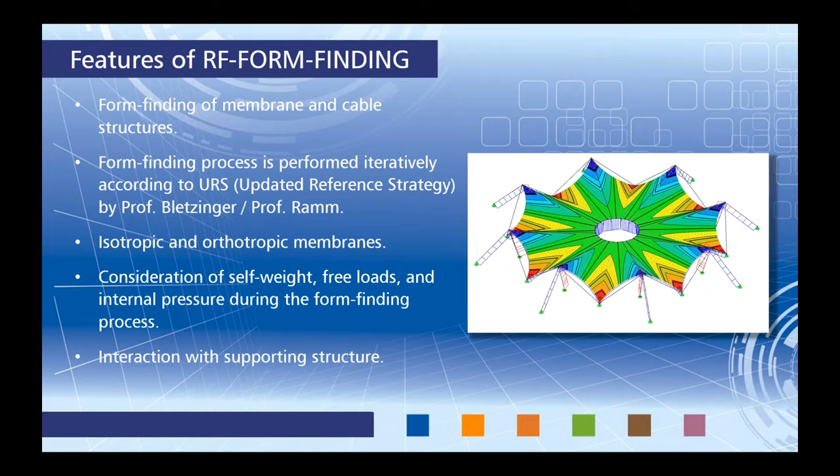Our other add-on module, RF-CUTTING-PATTERN, uses the minimum energy method for a very accurate cutting pattern. So essentially, we're turning this 3D membrane element into a 2D cutting pattern via the minimum energy method. We can also take into account uniform or linear compensation by warp or weft directions, meaning typically these membranes are going to be stretched when they're applied to our structure. So for the 2D cutting pattern, we can take into account that compensation.

We can also apply these compensations for boundary lines around the 2D cutting pattern, so it doesn't necessarily need to be in the warp and weft directions. We can also allow for different allowances, such as for welding and for boundary lines. Welding for overlapping members, maybe we need some additional material. Boundary lines for the upper and lower portions of the 2D cutting pattern as well.

There is adaptable data organization, meaning even after we have performed the calculation for our 2D cutting pattern, we could go back and easily add in some additional material for welding and for those boundary lines without having to recalculate the 2D cutting pattern.

And lastly, I'll show you how to output the cutting patterns both graphically within the RFEM printout report, as well as tables. And these tables can be exported directly to Microsoft Excel for further sorting. And lastly, we can export them as a DXF file, open them up in AutoCAD, and show you how to utilize the cutting patterns this way.

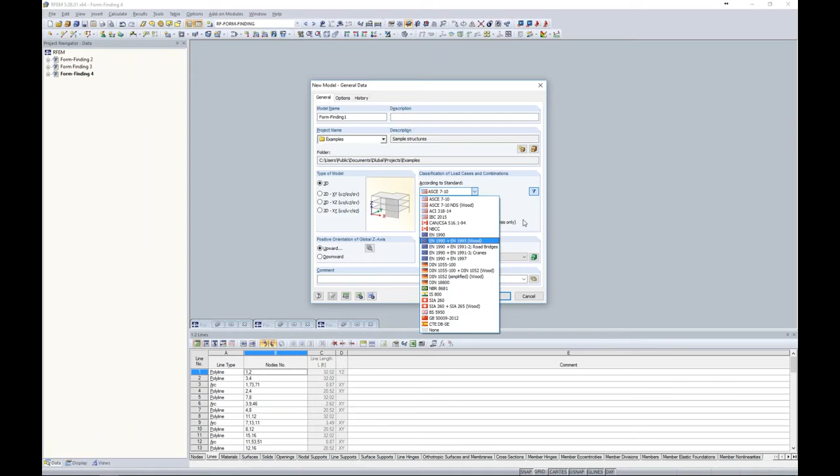So with that said, we can jump immediately into our RFEM model. When we go to open up a new model, we just give it a model name. I called this one RF Form Finding 1. The type of model is a 3D model. And our drop-down over here on the right is our load cases and combination generator. So you can see from my drop-down box that I have the ASCE 7 load combinations. I also have our Canadian standard, Eurocode standards, and many other international standards. When I have this checkbox checked, then the program will automatically create those load combinations.

You can see that when I uncheck this, then I can manually put in those load combinations if I'd like to as well. It's important under the Options tab when we're utilizing RF-FORM-FINDING and RF-CUTTING-PATTERN to check on these checkboxes. Otherwise, we won't have those options within RFEM. So when you're checking out the form finding of our membrane structure, it's important to check these checkboxes, and then we can launch our model.

So up pops RFEM, and you can see our basic graphical display here in the center. We have our tables to utilize down at the bottom. Over on the left is our project navigator, which controls some of the input data. We'll also see our results available here, and lastly, we have all of our tools up at the top. Today we'll be using all of these options.

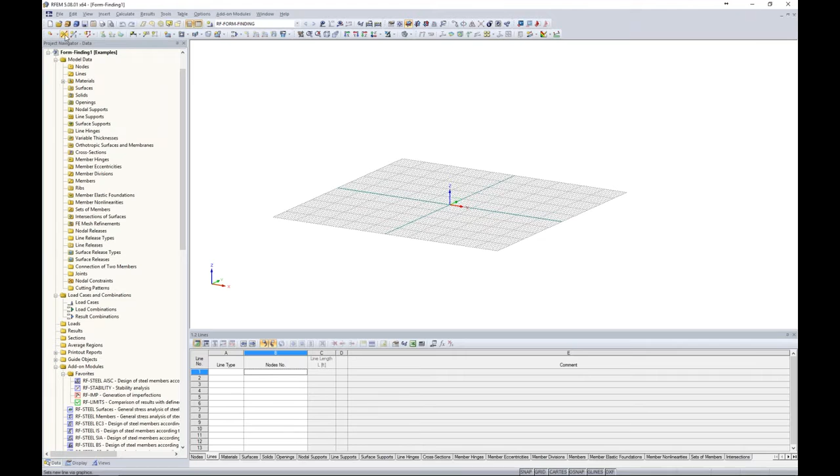I want to begin with drawing a basic line element. So up in my toolbar, I can choose to draw a new line, and you'll notice that we have many different line types. You'll hear me say this often today, that we have a lot of AutoCAD-like capabilities within the program. Things like complex geometries, which is quite common for membrane type structures, is really no problem to model within RFEM.

To begin with, we are just going to do a typical straight line here, and I could draw this graphically in my viewport, but I can also just enter in nodes numerically. For example, 0, -5, 35, then click apply, and I enter my second node at 0, -30, and 15, then hit apply. Now you can see we have this line element in our 3D view.

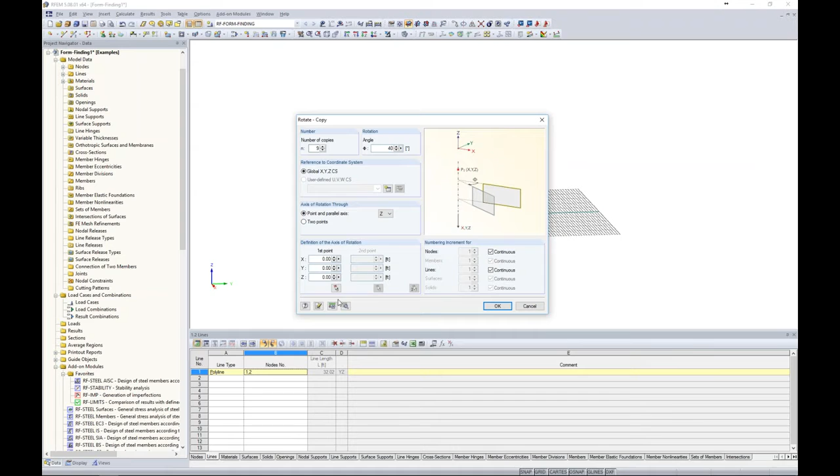I'm going to select this entire line and the nodes and use my rotate copy tool. Here I can specify that I would like 8 copies at 40 degrees, rotating everything about the origin 0, 0, 0. Down at the bottom, if I click on expanded settings, I can create lines between my copy nodes, and even create surfaces between those lines. Now when I click OK through all of these dialog boxes, I have my conical structure with just a few clicks of a button.

Now turning this into a plan view, and maybe I turn off my grid down at the bottom, I'd like to create cable elements spanning between my longitudinal lines here. A cable element certainly can't be constructed in the field as an arch type line like this, so we need to create straight lines here. How do we quickly do this?

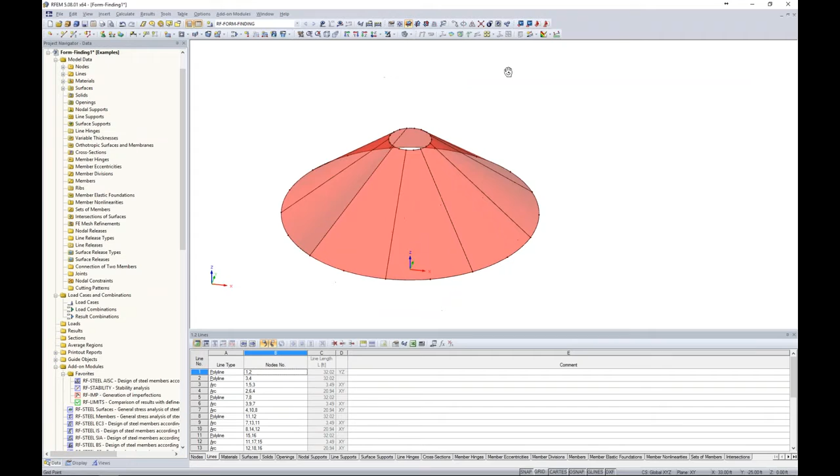I'm going to turn this into an elevation view, and highlight all of my members down at the bottom. You'll notice that my table 1.2 lines shows me exactly which lines I have selected in my graphical view. Using this feature within the table, I can show the selected objects only, so these are only my lines selected at the bottom of my structure.

The line type right now is set at arc. I'm going to change this to polyline, then using the F8 key, I can quickly copy that same setting down for all of my line elements here. Now if I turn this back to my plan view, you'll notice that these are now straight lines, but I still have this node in the middle that I'd like to get rid of.

For this, I'll turn this into wireframe view, and now holding down my control key, all I need to do is graphically select all of my nodes here. Then I simply click the delete key, and I have these straight line elements.

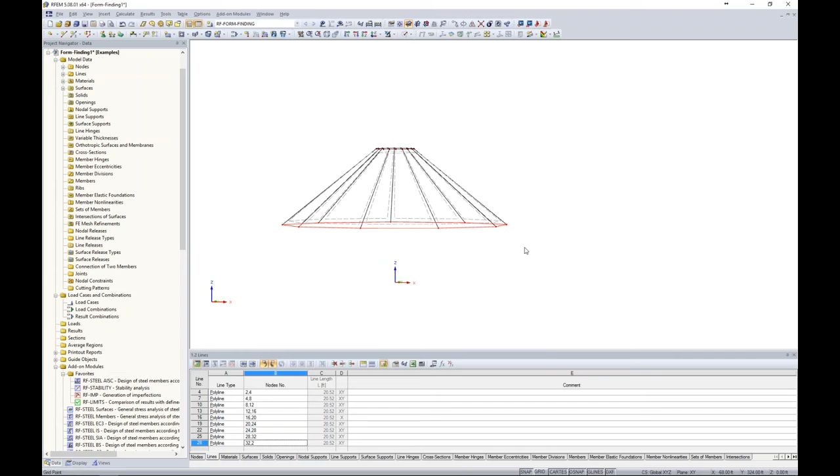With these line elements, I'm again going to select them graphically down at the bottom, and right click to edit the line. Every member within the program is created with a line element underneath it, so we have a nice tab up at the top called member, and we can create a member available. Now up pops our new member dialog box, and we can create a new cross section.

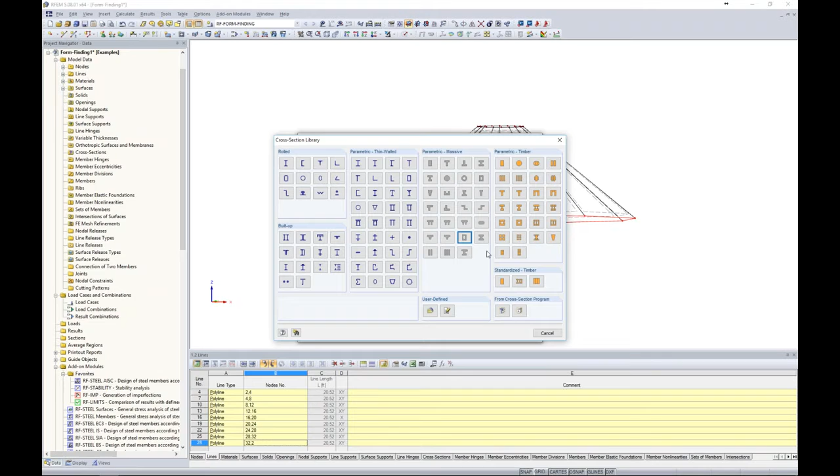Here I launch my cross-section database, and you can see we have many different cross-sections, such as rolled sections, built up, thin-walled, massive for concrete sections, and timber. For these elements, I'm going to utilize the solid sections here. We have our filters over on the left, which show some different producers applicable to the Eurocode design. We also have our AISC database.

Now I can scroll all the way down to the bottom to choose a half-inch diameter cable element. My default materials within the program are 4,000 psi for concrete and steel A992. I'd actually like to create a new material here.

My material database is brought up, and this looks similar to my cross-section database as well. I have my filters over here on the left, so you'll notice that under material category, I'm going to change this to stainless steel. Now I have the ASTM as well as Eurocode to select from. Looking at ASTM, I have a very long list of all the stainless steel materials I could possibly think of. We can also utilize our favorites list, which I created called USA.

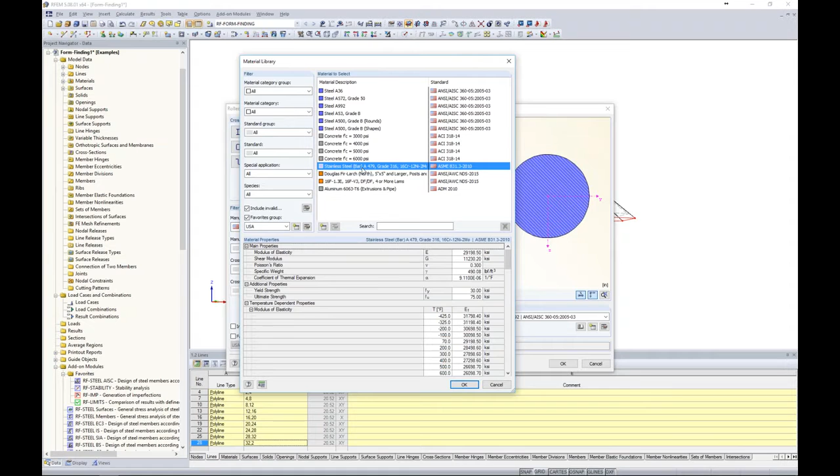These are just common materials that I use quite often for projects, and you'll notice I added stainless steel A479 here. I can select this material and click OK through all of these dialog boxes. Now the member type is set at beam, but I actually want to change this to a cable member - that's the element we're trying to model here. So now I can open up the member type.

This is available because I've activated the RF form finding add-on module; otherwise you wouldn't see this option. Here we have the cable parameters for form finding, and with this we either have geometry or force. With geometry, we can set a target cable length or a target cable absolute sag, relative sag. With force, we can set a force in the cable or a force density. These are the properties we'd like to see after the form finding process is complete.

When we're choosing geometry, this is maybe relevant for border cables and membrane structures, such as what we have today. The force option is maybe relevant for cable webs. For our example, we'll choose a target cable absolute sag of 1.5 feet, and I can click OK. So now that I've set this form finding capability, I click OK.

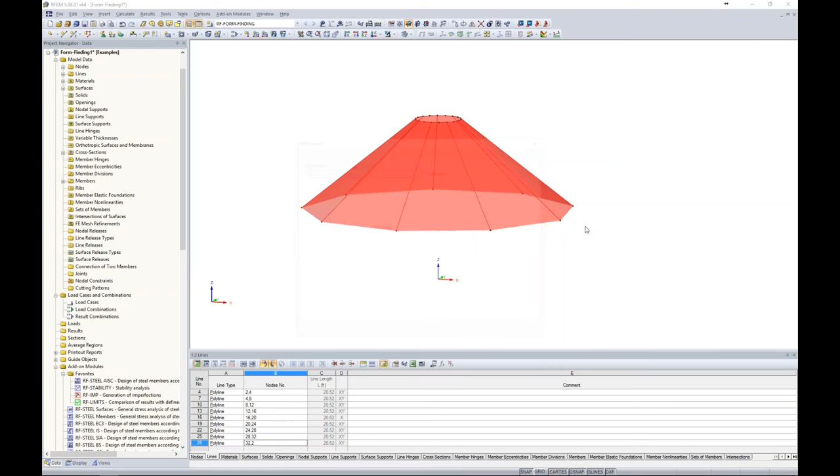Now we have the cable element specified down here at the bottom. I want to turn this back into the rendered shape to show you guys that right now my surface elements are red - that means there's probably something missing that the program is trying to flag. If I highlight all my surfaces, right click and go to edit, you'll notice my stiffness is set to null - null means nothing. So we need to put in these material properties as well as our form finding process for our surface elements.

So the first thing I'm going to do is use my dropdown to select membrane orthotropic, and here is where I'm going to create a new material. Membrane materials are not so straightforward as something like steel A36 or A572, for example. This is something we maybe get from the manufacturer, or maybe we do our own testing on these material membranes. So when I go to create a new material, I need to first give it a description.

Our material model by default is set to isotropic linear elastic. I actually want to change this to orthotropic elastic 2D. Now up pops my dialog box for my stiffness properties.

For this, I'm going to jump back to the PowerPoint to show you a quick screenshot of some calculations. For my membrane material, I got this from my colleague in Germany - basically these are the calculations after placing this material membrane into a biaxial testing machine. We apply different forces and get results based on stresses and strains with those different forces applied. We do our calculations in order to find out what these stiffness parameters are. So that's a little history about where these particular membrane properties came from.

Back in RFEM, we can simply apply those stiffnesses here. For example, it was found that EX is 93 KSI, our EY is 84. Our shear modulus is going to be the same in all three directions at 0.15, and our Poisson's ratio is also important at 0.314. Now I click OK.

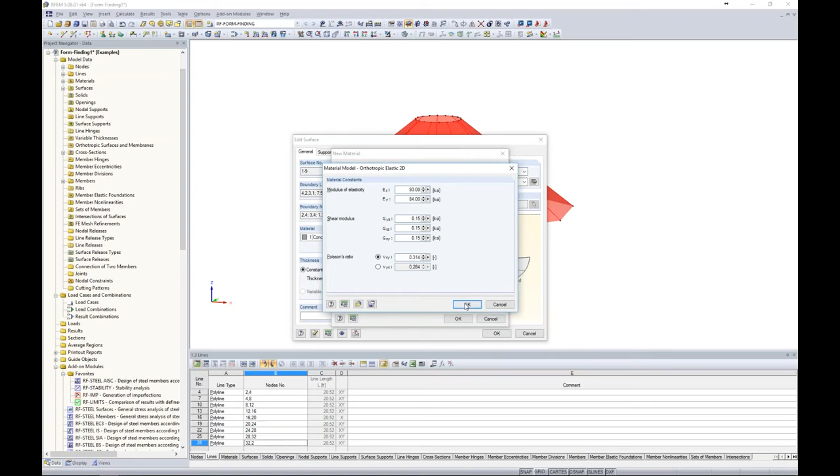So we have now defined the specific material we'd like to use for these surface elements. Now, similar to the cables, we'd like to edit the parameters of the stiffness - these are options that are available, especially this form finding tab, when we activate the form finding module. The type we'll use here is constant thickness, and under my next tab I'm going to set the thickness at 0.04 inches.

Then I can click on my stiffness matrix to see those values here, perhaps I'm interested in those. Under the form finding tab, this is the availability to define pre-stresses along the warp and weft directions with our form finding module. You'll notice we have two different calculation methods, both the standard and the projection, and this just comes from the general form finding method URS that I mentioned in the PowerPoint.

Standard is really used for membranes supported by points, arches, or pneumatic structures. Pneumatic just means they are air-supported structures supported by internal air pressure, which you can see here is where we define that internal pressure. Projection is used for conical shapes.

That's actually the type that we have today. But just for example purposes, I want to show you what this form-finding deflected shape looks like using the standard method to begin with, so you can see why we've chosen the wrong calculation method.

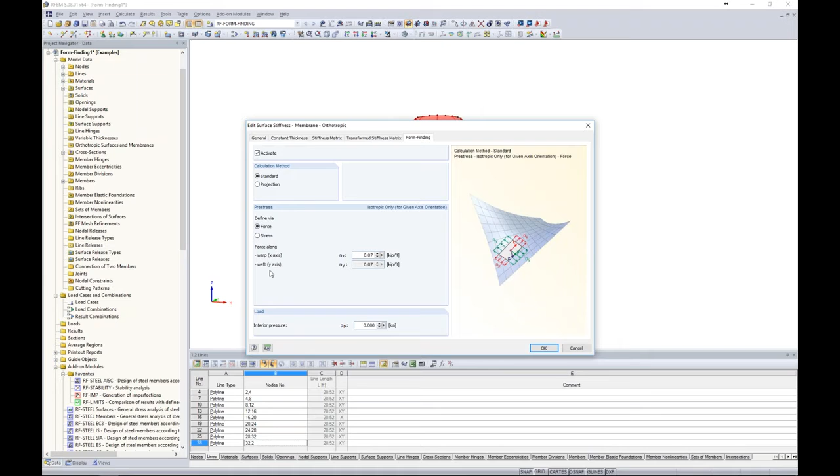Before I define these, it's very important that we go back to our model. You'll notice my material is now blue because we specified these specific material properties, and I can right-click and turn on my local axes. If we're going to define these pre-stresses according to the local axes, you'll notice all of my local axes are going in different directions.

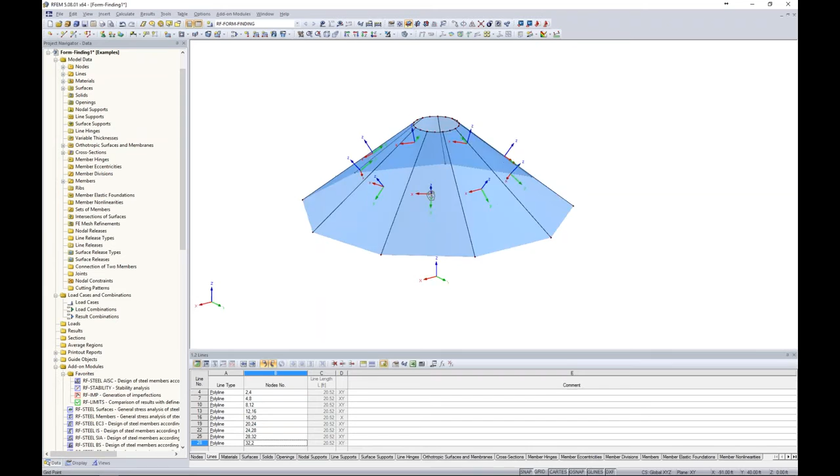So this is not good if we're going to apply our pre-stresses globally to all of our surfaces, and yet they're going in different directions. So how can we address this quickly without having to redraw all of our surfaces?

Well, if I highlight all my surfaces and right-click to edit them again, we have a tab called Axes here. Axes allows us to quickly rotate our local axes, and for example this third option down here, we can point all of our local axes direct to a line.

Now this line can be a fictitious line within the model. Here, for example, we'll choose the origin as the bottom point, which goes right up the center of the structure, and our second point will be at the origin but at a Z elevation of 35 feet.

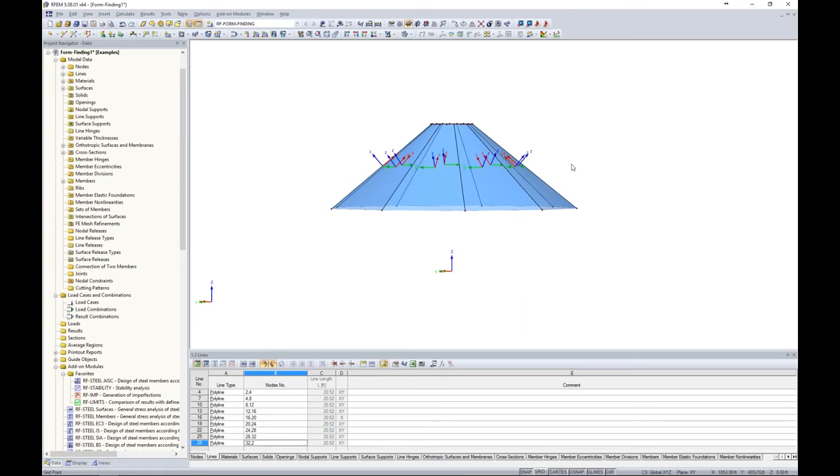So now when I click OK and take a look at my local axes, all of those X local axes are pointing right towards the center of my structure. This is very important when we're defining our pre-stresses for our surfaces globally here.

So now going back to our General tab and Stiffness Parameters, under Form Finding, here is where we can specify our force in the warp, or the x-axis, and weft is the y-axis. These are also known as the longitudinal and transverse directions. So for NX, maybe we'll select 0.55 kips per foot, and we click OK.

Now that we've defined these pre-stresses, and I can turn back off my local axes, we'd like to run this form finding calculation. Before we can do so, we do need to support the structure somehow, otherwise we'll obviously get some type of instability.

So just applying nodal supports at the bottom, I have my typical hinged support here. I can highlight over the bottom, and I'll apply just a hinge line support at the top, nothing special here.

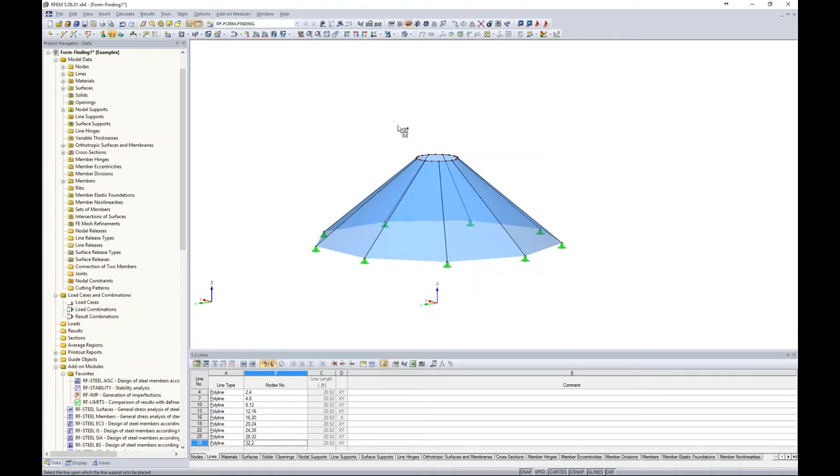So now with this RF form finding, we just click show results. It's asking me to start the calculation. That's fine, we're applying the URS method. Remember, we are running the standard procedure now, so in just a few seconds we'll get our deflected shape based on those pre-stresses.

So as we can see for our conical structure, this is not the ideal shape that we would expect. So I think that should immediately flag us that, okay, we probably used the wrong calculation type.

So highlighting all of these surfaces again, we can right-click to edit it, go back into our form finding settings, and let's change this to projection. I need to redefine my NX and NY here. It's also asking me where I want to apply the prestress values from the distance from the center of the structure. We'll set this as 1 foot.

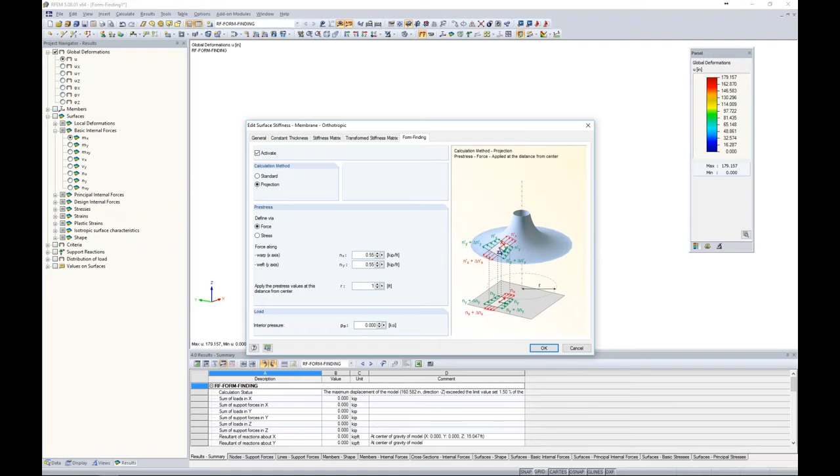I click OK. It's asking me to clear my results, that's fine. Now let's rerun the form finding process, again applying those same pre-stresses, but using a different calculation type here to get our deflected shape.

And now we can see that this looks much better in what we would expect for our conical type structure. So what does this tell us? Well, in our results, which is now available in our project navigator over here, we obviously can see the global deformations in inches here in our contours, but maybe we're interested in the internal forces of our stresses here. So I take a look at my surfaces, and in particular NX.

Now looking at my contours, I see at the bottom I have a stress of 0.566. Well, this matches our pre-stress that we put on the structure for the form finding process, or very close to it. So that's great. That's exactly what we'd expect. Looking at NY, exact same scenario. At the bottom we have 0.53. We applied a 0.55 pre-stress, so that's about what we would expect.

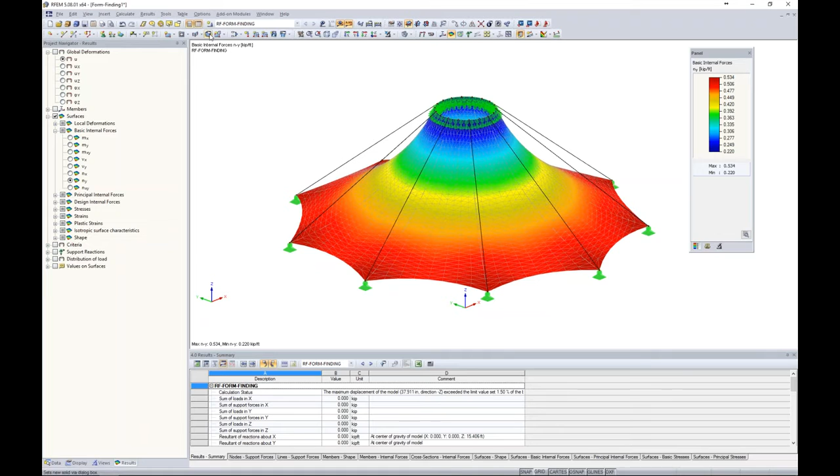Okay, so now that we have done the form finding process, it's time to actually apply some loads to this structure. Now, what we want to do is to maybe create a new load case here, and I can simply do this utilizing my tool up at the top, and I will give the first load case a description of dead load. Now, the action category is important because this tells us how we're going to apply these loads to the ASCE 7 load combinations, and in turn, which load factors should be applicable.

So we will keep the dead load for the action category. Self-weight is checked automatically for dead load, so this will account for our self-weight within this particular load case. For all other load cases, we'll leave this as unchecked so we don't account for it twice. We click OK, and now you can see that no loads have been applied to our structure yet, but using the new surface load, we can specify a load direction in the global Z.

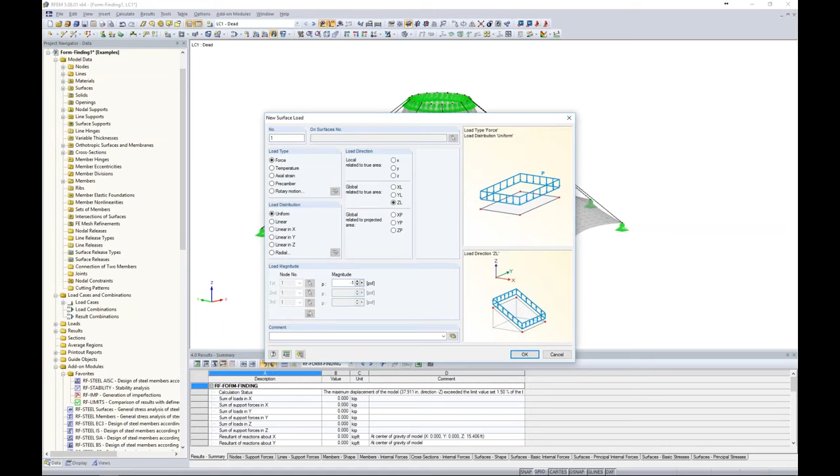And I'd like to apply a magnitude here. Now, let's say that this structure is just a basic canopy or something of the sort and really won't see too high of load. So you'll notice I have KSF, kips per square foot right now. Well, I can easily access my units and decimal places, and maybe I want to change my area loads to something more like PSF, for example. I click OK, so now I can apply -1 pound per square foot, a very, very small dead load to the structure. I click OK, and then I can select all of my surfaces.

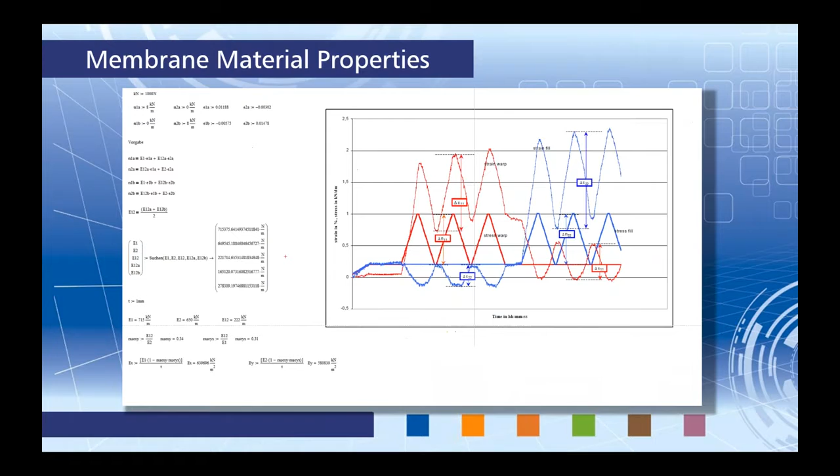So now you'll see that that dead load was applied to each surface. The hole at the top was taken into account. Everything was done automatically. Now, after dead load, we'd like to apply some wind loads. Now, wind loads for a conical type structure. Well, for this, I'm going to again jump to the PowerPoint because I'd like to reference the European Design Guide for Tensile Surface Structures, and this comes from Appendix A 1.2.

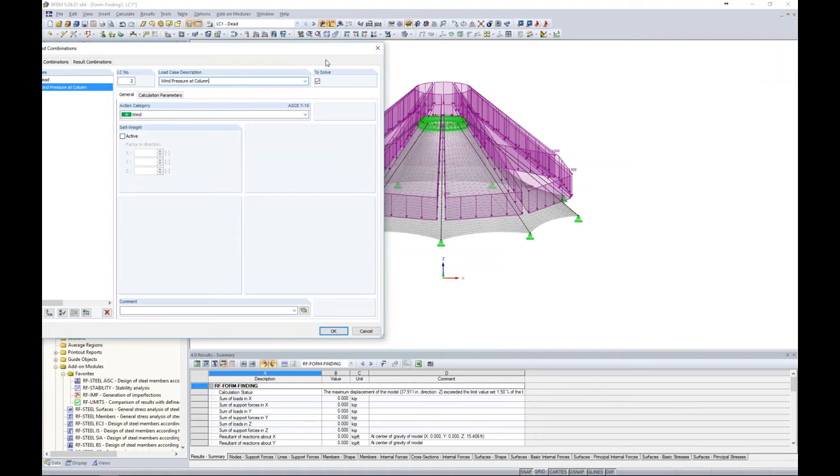So I'm once again going to create a separate load case here. The action category will be wind, and the description here will be wind pressure at column. Now I say at column because a little bit later on I will draw in 3 separate columns around our structure at 120 degrees. So this first wind load case will be that wind direction coming straight towards the column. I click OK. So now that I'm in a new load case from my drop down here, I don't have any loads applicable right now.

Putting this into elevation view, my first zone, zone D, from our table that we just saw is this front structure here, but it's actually 45 degrees around this front column. So what I want to do is I want to select this node down here at the bottom, and I'm going to use my rotate copy tool.

This time I'm only going to make one copy at 22.5 degrees. And I want to make sure under my details here to clear out the settings that I used before to create surfaces between my copied nodes. In the same sense, I'm going to do the same thing with my rotate copy tool in the negative 22.5 degree direction.

So for my wind loads, I previously used this new surface load. New surface load will apply the wind load to the entire surface, which is not what I want in this condition. We have a nice feature here called free loads. So free loads allows us to apply basically any different shape that you can think of, whether that's circles, rectangles, polygons, all to our surfaces. So it doesn't necessarily need to encompass the entire surface. For today, we will use a new free polygon load.

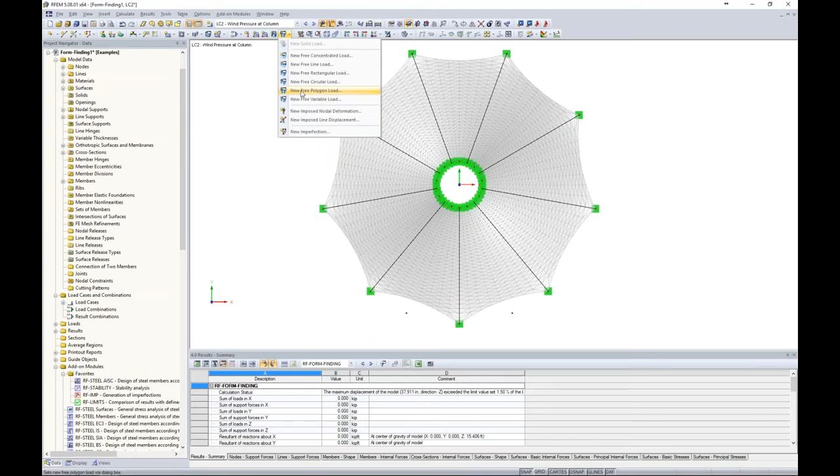Now for this, we just specify our surfaces. We can either select them graphically, or I can type in 1 through 9, or I could leave this as all as well. We're going to apply it in the local Z direction, which is normal to the face of the surface according to the local axes rather than the global. The magnitude here, I determined from that table, will be -9 pounds per square foot.

Then I just select graphically my different nodes that I would like to apply this wind load to. I click OK, and now you can see that this wind load pressure is applied to the front of my structure, but not on the entire surface elements here.

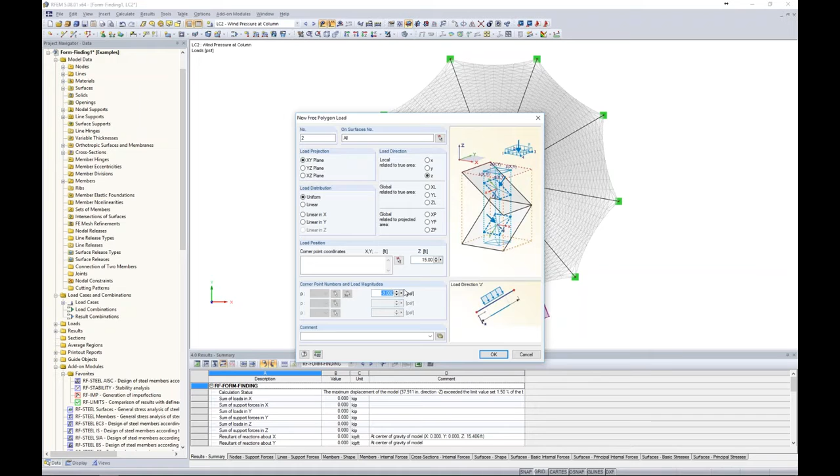Now, in the same sense, I'd like to do the same thing at the rear of the structure, but 120 degrees. So I'm going to, again, use this polygon load here in the local Z direction. I'm going to change my magnitude to 8 PSF, and then I click on my different points at the rear of the structure. I click OK, and now we can see that there is a surface load being applied to the rear of the structure.

Now, in the same sense, I'd like to apply my other zone on the right side of the structure. So we again use a polygon load. We'll type in surfaces 1 through 9 in the local Z direction. My magnitude changes to 12 PSF. This is my highest load around the circumference of the conical structure. Then I select my points.

Now, something to note here, I would like to encompass half of this surface. Now, the program has snap settings, just like what you would see in AutoCAD. So it recognizes that this is the midpoint of that surface. So instead of creating a new node like I did previously, I can just use this snap point. I click OK, and now you can see we have that suction on the right side.

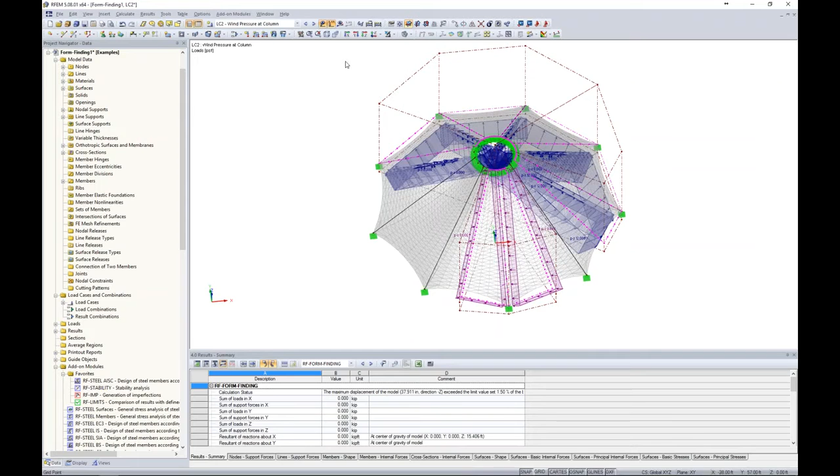Now, lastly, we have a small zone here to do the exact same process. Surfaces 1 through 9. My magnitude is changing to 5 PSF, and I click on my remaining nodes on the right side of my structure. Okay, so now that we have these suction loads on the right side, we could do the same process for the left side, but I really want to show you those tools that make modeling a little bit more efficient.

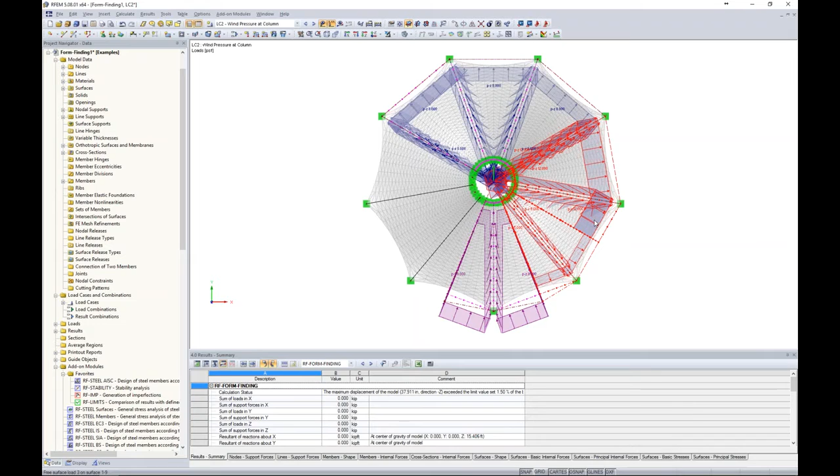We have a symmetrical structure here, so what we can do is just hold down our control key to highlight these two loads over here on the right and use our mirror tool. Mirror is something that you would find in AutoCAD. It's also available in RFEM where we can create a copy. We can mirror about the global axes and the origin. And I click OK. So now you can see that those loads are now generated on the other side of the structure. So essentially you can see how a very complex load can be quickly drawn within the program, especially for these conical type structures and membranes that would normally be very complex.

Now, as I mentioned in the PowerPoint, we want to take into account both pressure and suction from this front-facing wind direction. What I can do is go back to my load cases and combinations, and I can create a copy here. Now, instead of wind pressure, we'll call this one wind suction. I click OK.

Now, my loads look exactly the same, but what I want to do is to double-click my load up here at the front. All I need to do is to change this to a magnitude of 7 PSF to account for that suction at the front of the structure instead, so just a different load case. Now we have our wind loads for both pressure and suction.

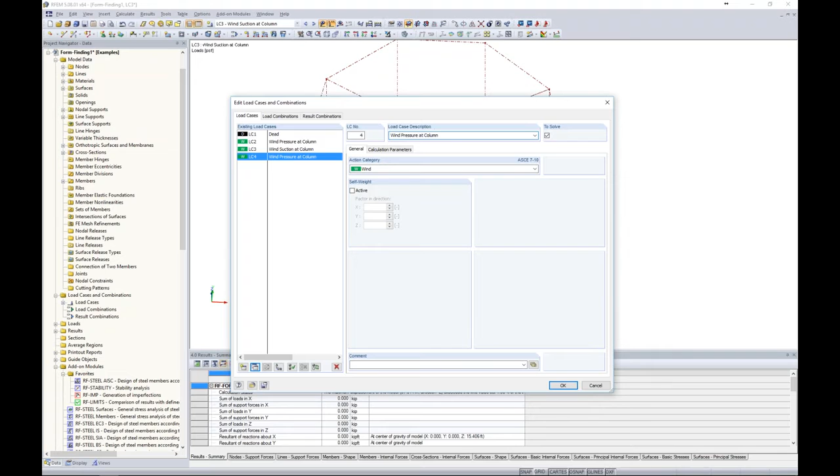Perhaps I'd like to take into consideration if the wind load shifts at any point along the structure. Well, what I'd like to do again is go back to my load cases, and I'm going to choose my wind pressure at column and create another copy of this. Now this time, instead of at the column, I'll call this one between column. I click OK. So what I'd like to do is to shift all of these loads 60 degrees over from where they're being applied now.

For this, I'll utilize my project navigator over on the left. And this has all of my input data just like my graphical view and tables do as well. For example, if I scroll on down to my loads tree, I'll see my 4 different load cases. In LC4, I can expand my free polygonal loads. Well, here I can use my shift key to select all my surfaces, which are highlighted graphically.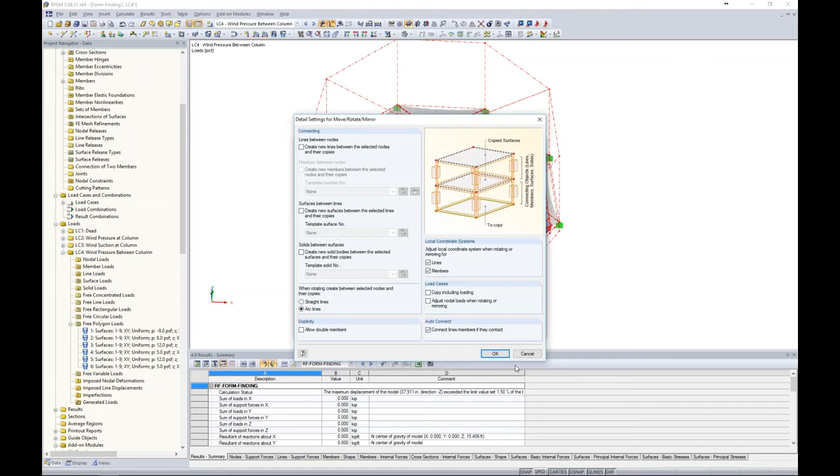I'm going to use my rotate tool. I'm not going to create any copies, and I am going to rotate it 60 degrees. Again, making sure that everything is clear in my detail settings here. I click OK. So now you can see that everything was just shifted over 60 degrees. Everything was taken into account automatically for our surface load application, and that's all that we need to do.

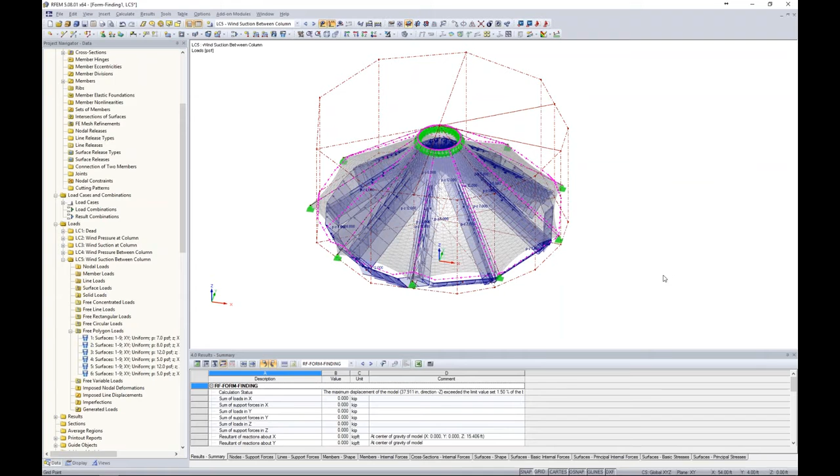Going back to the load cases, I do the exact same thing, but for wind suction at column, I create a copy, I rename it to between column, click OK. And then here I just make sure that under my tree settings for loads, I'm under LC5. I select all of my free polygonal loads. I again use my rotate copy tool to make a rotation of 60 degrees. I click OK. And just like that, all 4 of my load cases are complete for my wind loads.

Now, lastly, I'm going to create one more load case, and we'll call this one snow load. The action category will be set at snow. I click OK. Now, because I didn't create a copy of any of my previous load cases, I should have no loads in this particular snow load case right now. For this, I am going to go back to our new surface load. I'm going to apply it in the projected Z direction with a magnitude of -8 pounds per square foot.

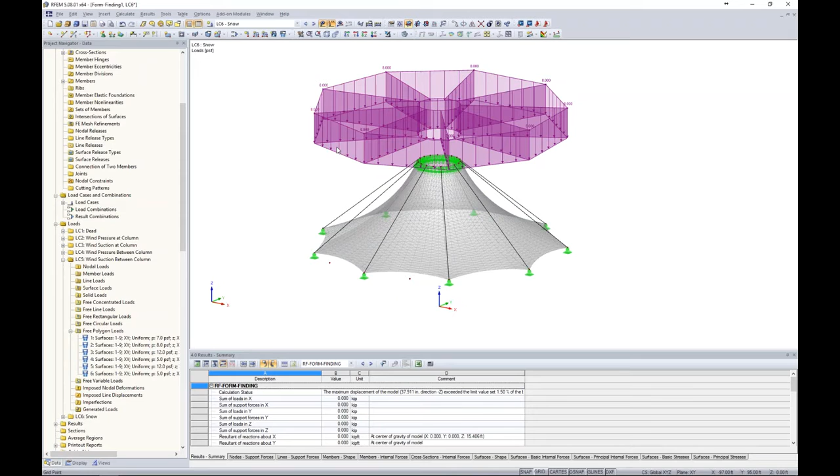I click OK. I can select all of my surfaces graphically, and here's my projected snow load again with that opening taken into account and all of my surfaces. So that's really all that we have to do in terms of our application for our loading. Taking a look at our load combinations now.

So it looks like I forgot after the fact, which is no problem. Going back to my form finding, I can right-click under my general data. I left this as unchecked. Well, I want to check it because I want my load combinations to be created automatically. So you can see that you can always go in afterwards to select that or unselect that.

So now going into my load combinations here, I take a look at my actions and I'll see that I have dead load, wind load, snow load. Dead load and snow load, pretty self-explanatory, but wind load, we have 4 different load cases here. So how is the program going to apply these to the ASCE 7 load combinations? Well, right now it's set to alternatively. So alternatively means it will be LC2 or 3 or 4 or 5.

We can also choose simultaneously so that all 4 load cases are acting at the same time, or differently. Differently means that the program will come up with every different combination with these 4 load cases, such as LC2 plus 3, 2 plus 3 plus 4, 2 plus 5, and so on. So you do have control over those different action categories.

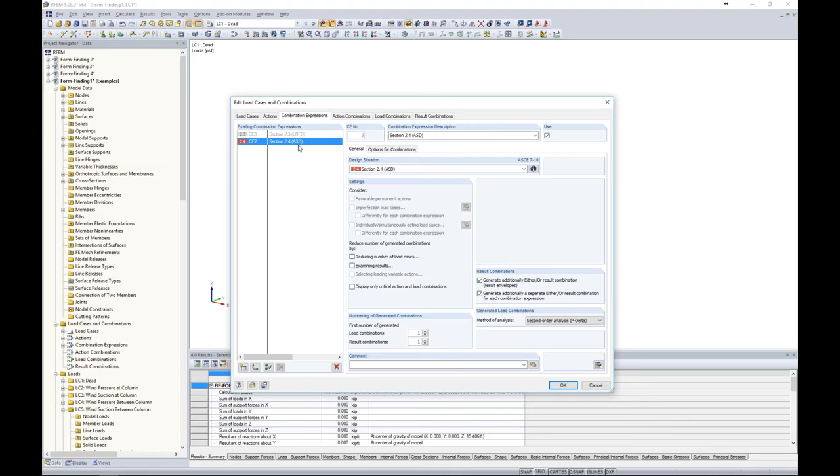Now, combination expressions: automatically the program will create our LRFD load combinations as well as our ASD load combinations. Let's say for membrane design, I'm not interested in applying my LRFD load factors. So what I can do is just uncheck this for now. I'd rather just generate the ASD load combinations, and I can click on my info button here to see that my load factors are more around 1.0, which I'd like to use for my membrane design.

So then under the load combinations, you can see the program automatically generates our ASD load combinations based on the existing load cases in the program. And lastly, we have our result combination, which is nothing more than an envelope solution for all of our ASD load combinations. Now I can click OK.

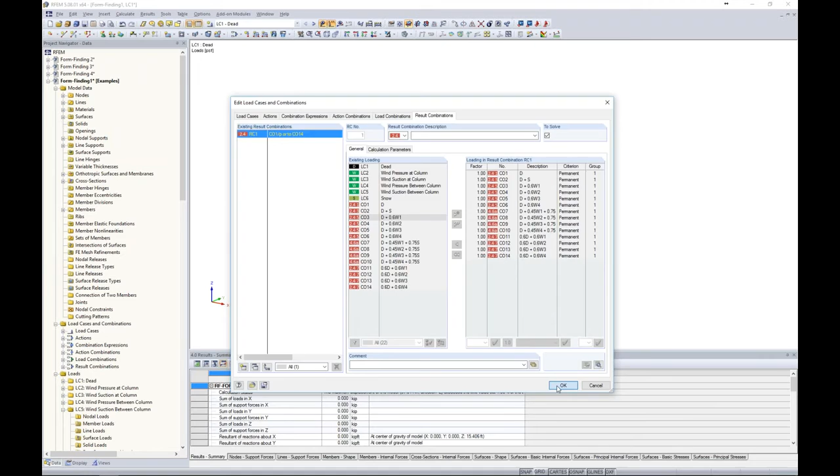So let's run one single load combination here just to view how our results will look. What we're going to do is utilize the RF-FORM-FINDING deflected shape, which we've already done, and just apply dead load to it. And you can see that solves rather quickly. Taking a look at our results now, it looks the same as what we saw with RF-FORM-FINDING, but now we should obviously see some higher internal forces and such.

For our membrane here, we can view our NY forces, our NX forces, for example, in kips per foot as contours. Remember, we have our cable elements down at the bottom, so I can view my members and in particular my internal axial forces for those cables at the bottom of my structure here. So that's what's available in terms of solving for the analysis only within RFEM.

Now for membrane design, you could take these internal forces, maybe you have an Excel spreadsheet that you use, or you do some hand calcs to do design of the membrane. I want to show you our other add-on module in the program that we can also utilize to do some design checks for our membrane elements. For this, we will launch RF-LIMITS.

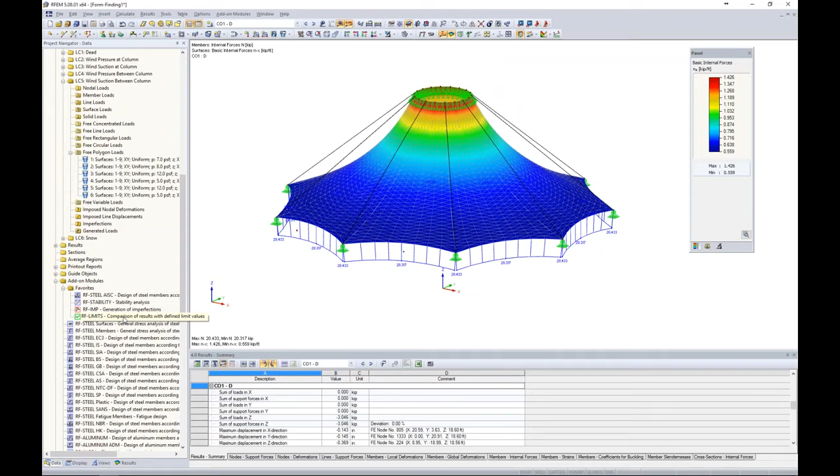So RF-LIMITS is pretty straightforward. This is an add-on module, and when I say add-on module, it's nothing more than just a dialog box that pops up within the program. We don't need to remodel anything. All that we're doing here is specifying some limit parameters so that the program can give us a design check based on internal forces to design capacities.

So for this first case, let's rename this case, and we will call it max dead. I click OK. So perhaps for this particular membrane, after our testing, we found out what the max NX and NY internal forces should be, meaning that the material should not exceed these internal forces, otherwise it's going to fail. So we have some specifications for dead load only now. So we're only going to check dead load, and I move on to limit parameters.

So my limit description, I can just call this one membrane. Now the object type, I'll select surface here. Now I can either select my surfaces graphically back in RFEM, or I can just type in 1 through 9 there because I know I have 9 surfaces. And then here is where I can select my limiting internal forces. For example, I have my NX force here.

When I check this checkbox, the program allows me to input some ranges. Let's say we've determined that the max value for dead load should be nothing more than 0.43 kips per foot, and I want my range to be somewhere in between this range. Now, this is tension only. So if I were to experience any compression forces, obviously that membrane is doing nothing within our structure, so we'd certainly want it to flag us. So I'd expect something up to 0.43 within the tension range.

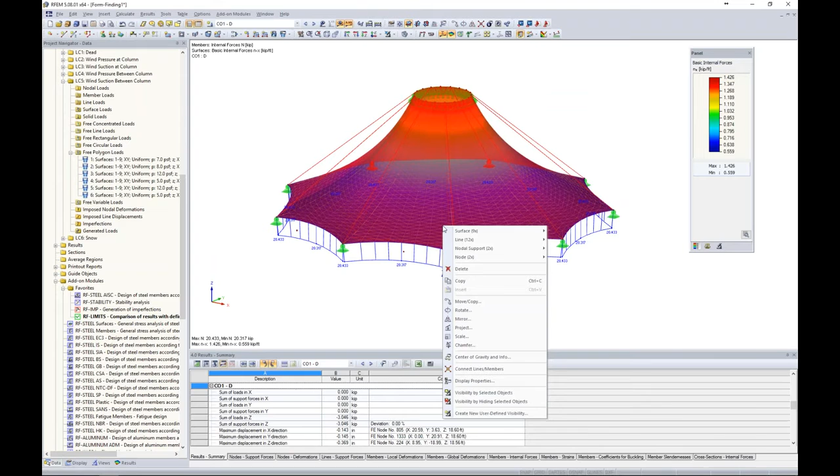I take a look, and it looks like my existing value is 1.396 kips per foot. This is well over the 0.43 that I originally put in. So what can we do to change this? Going back into RFEM, remember that I had defined my pre-stresses, which we can edit here. Take a look at our form finding tab. These are set at 0.55 kips per foot. Maybe I've determined that this is a little too high for my pre-stress forces. So let's change this down to something like 0.14.

And we click OK. So now you'll notice it's asking me to clear my results. That's fine. We've lost our form finding shape. That's no problem. We can rerun that either here within RFEM, but if I just go back into RF-LIMITS and I click calculate, the program knows that it needs to recalculate the form finding, then apply the dead load combination to come up with those new internal forces.

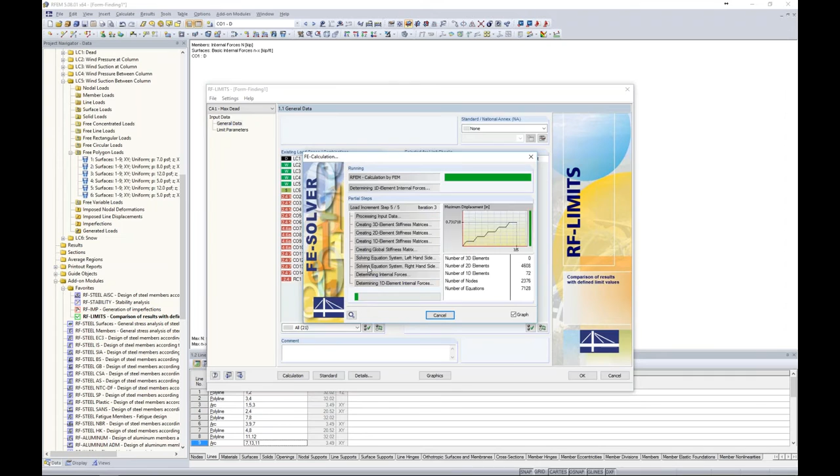Bringing those internal forces into this add-on module to compare to my limiting values. Now you can see that we're around 0.409. That's within my range, so I get a design ratio of 0.95. So that looks good. Now I can also view the limit checks by surface. So we have our table here of all of our different surfaces. What's nice is that as I'm scrolling down through this table, it is synced up to our graphical view within RFEM, so I can know exactly which surface I'm looking at.

So that's good for dead load, but obviously we have a lot more load combinations that we need to take a look at. So let's create a copy of our case here, and this time we'll call it max total. So now for my max total under my general data, I have my controlling internal forces, my capacities for everything that should include dead load and snow load and wind load. So, you know, I've already checked my dead loads. Maybe I'm not concerned with that, but I'll move the rest of my load combinations over here to check for my calculations.

Now my limit parameters, again, I made a copy so it remembers all of my information from that last case that we just did, but I probably want to change my maximum values here since we're applying a lot more load. For example, nx max might be something like 1.26 from our testing. And ny max might be something like 0.95 kips per foot, and now I'm ready to rerun that calculation.

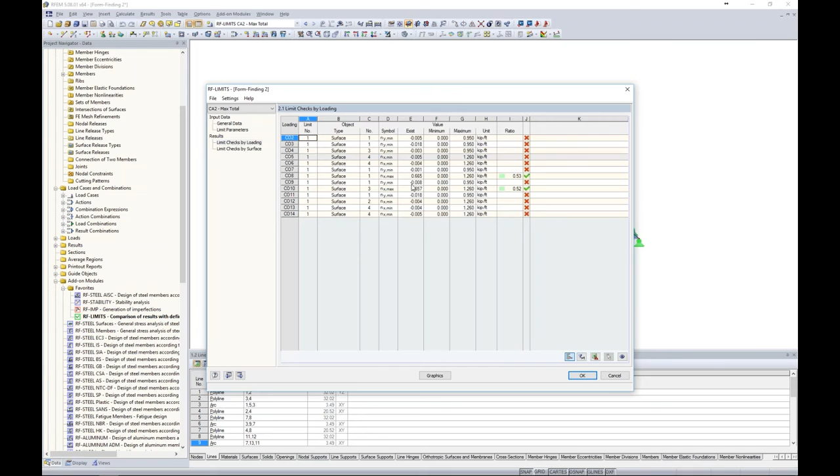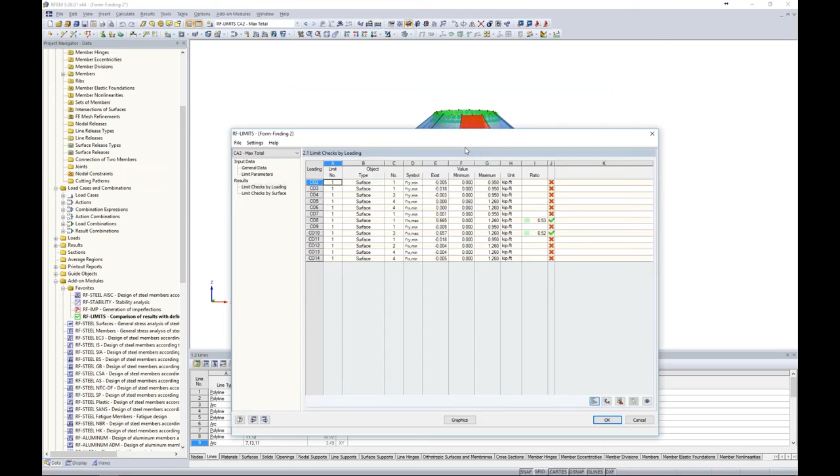Well, again, I'm seeing a lot of red here, which probably tells me there's some type of problem going on. But I look at my ratio, and I don't even have a ratio shown. Well, why is that? Looking at the existing forces, I have compression forces, and they're very, very small. So what exactly is going on here? Realistically, from the applied pre-stresses and my form finding, everything should be in tension, at least what I think. So there's something that I'd like to point out that we need to take into consideration.

Back under the General Data tab, we have this detail setting here. And you'll notice that default is continuous within surfaces. So what the program does with internal forces, but also with deflections, with stresses, with anything that we can view graphically, it uses a smoothing algorithm to tie all of these values together so that we can make sense of it when we're viewing it in RFEM. Otherwise, it would just be kind of random numbers, not really tied together with these nice contours that we could view. But that's fine for viewing purposes, but sometimes it's not okay when we're doing design, such as this case. The other option here is constant on elements.

So it will not use a smoothing algorithm to tie all of our internal forces for a single surface together, but rather it's going to take internal forces from each FE element into the program. Now, there really isn't a right or a wrong way to do this. It's just purely how you're viewing your results differently within the program. So by choosing constant on elements, we're foregoing that smoothing algorithm to make everything look nice and pretty, but rather just bring in the actual internal forces on each FE element. So now when I click OK, it's asking me to clear my results. I can rerun the calculation, but what's nice is it only takes a split second because the calculation's already been ran.

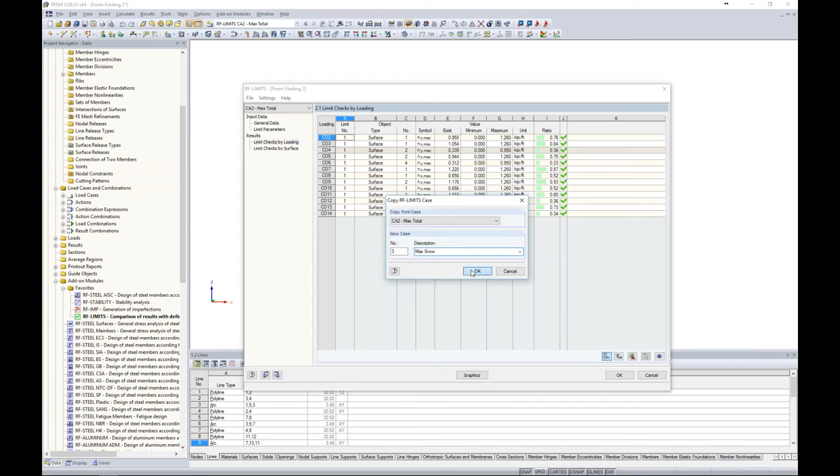Okay, so we want to create one more copy of this case, and this one we will call max snow, for example. Going back to my general data, I'm going to move all my load combinations over here. Maybe I want to check dead load and snow load only, because we have some different capacities for snow loads being applied. My limit parameters, perhaps I'd like to set this, done from my testing, to 1.00 for my NX, and my NY will be 0.72 kips per foot. I can run calculation.

Internal forces are already there, so it brings them in here. It looks like we're at 0.96, so we're below that 1.0 ratio, so that all looks okay. So I'd say that our membrane design per ASD load combinations is pretty much done. But remember, we did have those cable elements in there.

Well, we can use RF-LIMITS to check our cables here as well. So for this, I'm going to create a new case, not a copy, and you'll see why, that we'll call this one cables. Now, I can use my result combination here, which again is nothing more than an envelope solution for all of these load combinations. If I want, I can move all of these load combinations over here in place of this one, or both of them. This is the same thing, it just simplifies our results a bit.

Looking at limit parameters, this time we'll call this one cables. The object type here is member. Remember that we have 9 different member elements within the program. Those are our cables down at the bottom. And here we'd like to check our normal forces within those cables.

So keep in mind that these are being designed per ASD, so probably later on we'll come back and check these against our LRFD load combinations, which are more typical for design rather than ASD. But just to double check, for now, if we weren't passing ASD, we certainly won't be passing LRFD, and it looks like we have a ratio of 0.77. So everything looks good so far in terms of our code checks or our design checks for the ASD load combinations.

Okay, so now that we've completed the membrane design, let's consider the supporting structure. I mean, the membrane design is great, the cable design is great, but maybe we'd like to incorporate it with the rest of the structure here, all within one model.

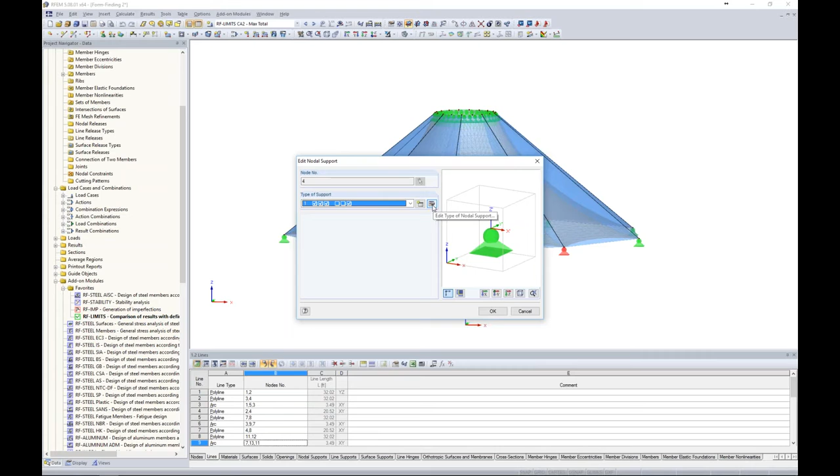So what I'm going to do is get rid of these supports, but before I do so, I want to double click and show you an interesting feature that we have. We can edit this support type or create a new support type, and of course we have our translation and rotation for our restraints. We can also put in some partial fixity here with spring constants, and then we have our nonlinearities.

In my drop down from my nonlinearity, you can see that I have this option called form finding stage only. So what this allows us to do is apply these support conditions only to the form finding process. Then when we move on to, let's say, our ASCE 7 load combinations, those constraints are no longer taken into account, they don't exist at all. So this is almost like a construction type phase that we can automatically account for within the program, a nice powerful feature rather than manually having to do this.

For our case today, I'm going to use my project navigator though, and open up my Nodal Supports. I can right click just to completely delete them. I'm going to do the same thing with my line supports, right click, delete. And now putting this into plan view, I'd like to create a ring type member at the bottom of my structure here.

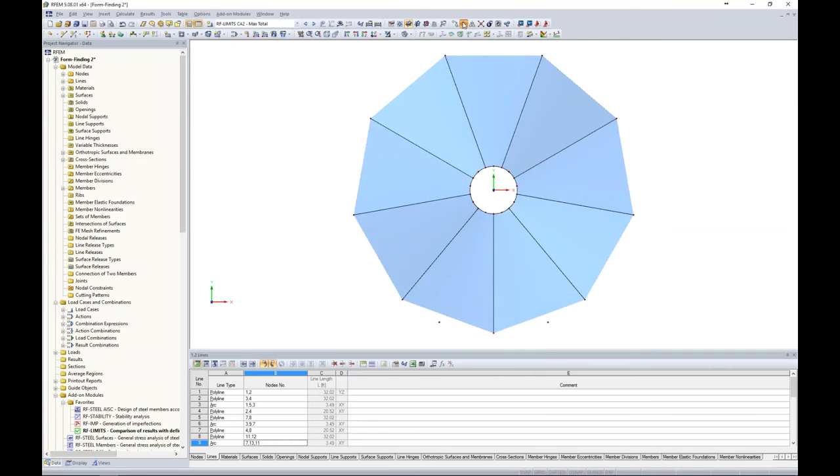I can easily do this by highlighting my node at the bottom and going to my rotate copy tool. Here I'll create 8 copies at 40 degrees. In my detail settings, I'll select the option to create a line between the nodes, and also create a member between the node.

The member type is beam here. This is just a typical beam or column element within the program. We're not working with cables or anything anymore.

I open up my library for cross sections, and here is where I select my circular hollow sections. Using the filters on the left, we have AISC, Canadian sections, as well as many other international standards. For today, we'll use an HSS 10 by 0.75, 10.75 by 0.25.

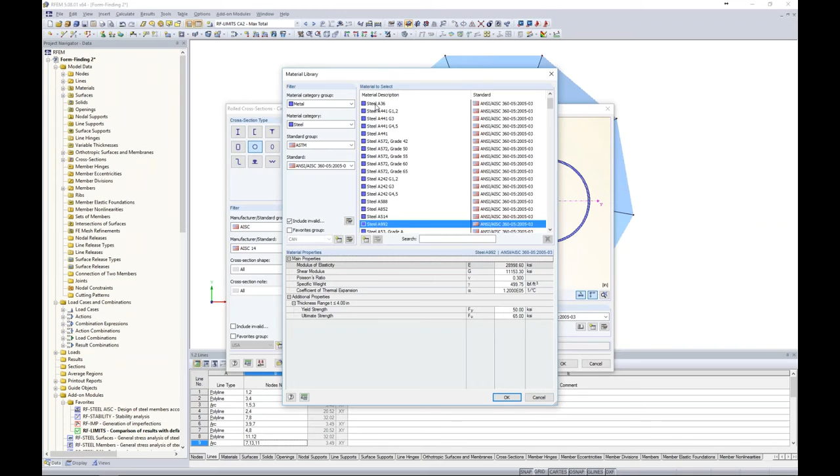Now the material is steel A36, so I want to create that new material. Utilizing my filters, I see steel A36 up at the top for my ASTM. I click OK through all these dialog boxes, and then I see my beam automatically generated around the bottom of the structure. That was fairly easy.

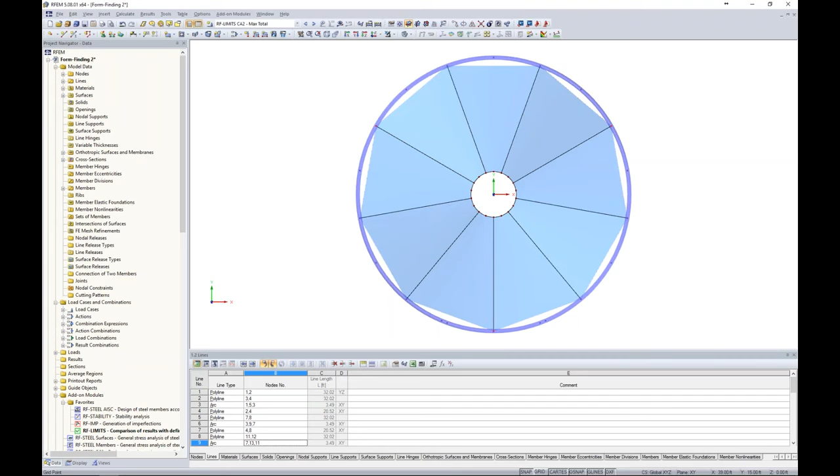Now, in the same sense, I'd like to create the 3 columns I mentioned before: one here up at the front and a couple here in the back, all 120 degrees apart. I held down my control key to select these 3 nodes, and I'll utilize my move copy tool. We'll create 1 copy in the negative 15 foot global Z direction.

I'm utilizing this feature just to show you some different options within the program. You could easily draw in these columns with a couple clicks too by drawing a new member. This is just one other way to do it.

Under the details settings, we'll utilize the copied lines and members between the nodes and create a new cross section here. I want to utilize an HSS section, but choose a slightly smaller one. We'll choose 8.625 by 0.25.

Steel A36 I've already defined within the model, so I'll always have this option every time I go to draw a new member. I select steel A36 and click OK.

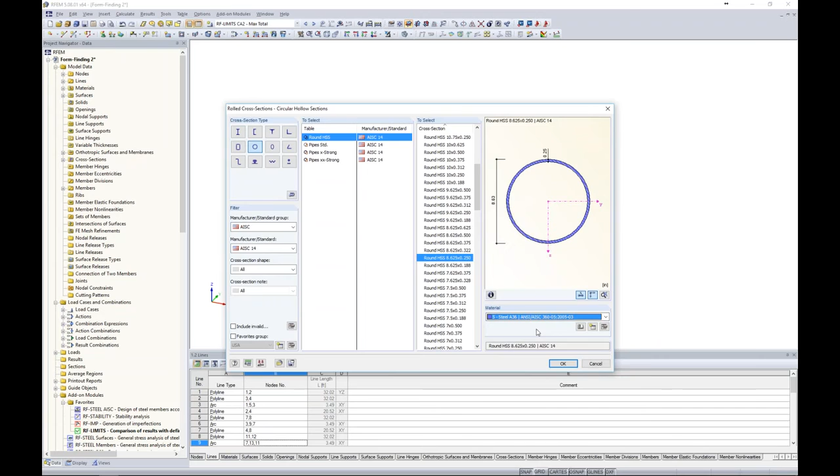I would like to have a member hinge up at the top, so the moment is released at the top of my columns. For this, I can easily create a new member hinge here. I get a nice picture showing exactly what my local axes are. The program suggests I probably want to release my Y and Z axes, and that's correct. I'd like to release those for my moment.

Just like our nodal supports and line supports, we have spring constants here for partial fixity, and we can also get into nonlinearities such as partial activities, slotted joints, and things like that. For us, we're just applying a simple moment release. I click OK through all my dialog boxes, and my 3 columns are created.

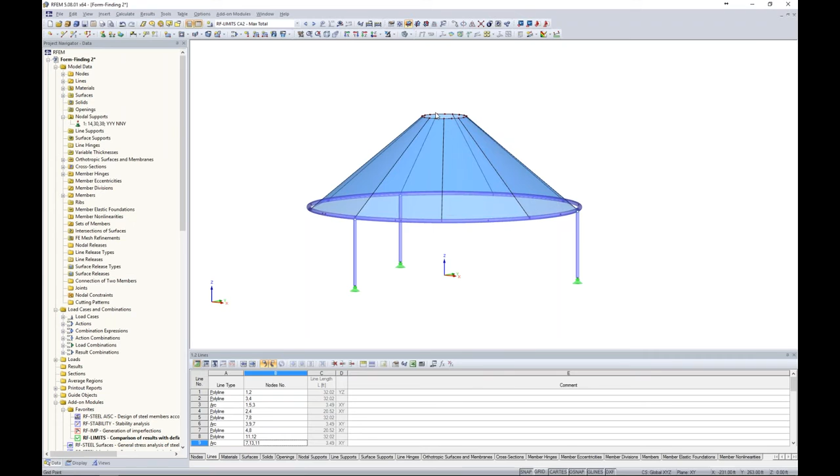Then I can apply nodal supports in a similar fashion to what we did before, just to the bottom of the structure. Now I want to continue modeling, because obviously the center of our structure is not supported, but for this I'm going to jump to a saved model just for time purposes.

You'll see that I've created this column up the center of the structure. I've added some braces to my outer columns here. If I zoom in to the circular opening, I applied an MC shape, 8 by 20, to that exterior circle.

And lastly, just some flat bars to tie it to that center column. These flat bars are just 1 inch by 8 inch bars. You can model in the rest of your structure here with any type of material, whether that's aluminum or steel, to account for the supporting structure.

So how do we utilize some of our other add-on modules to do a complete design of our membrane structure? Remember that we've already done the membrane design, which you can do with this structure I'm showing you right here. But let's take a look at our other add-on module, RF-Stability.

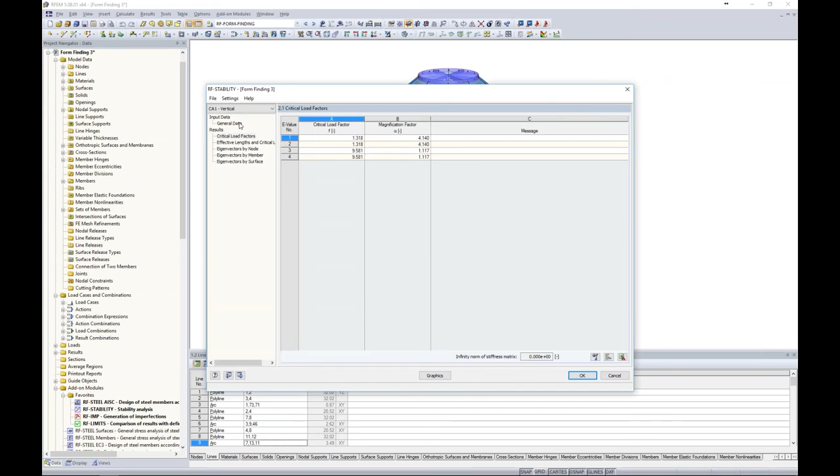RF-Stability is pretty powerful in the sense that we can do a stability analysis to show our different buckling shapes from an applied load. For example, I created this first case here called vertical.

I applied my load case dead load. Then when I run my calculation, I get my critical load factors for my structure. This is based on the buckling behavior of my entire structure with 4 different buckling modes.

I can view this graphically, which I think might be a little bit more interesting. Based on the applied dead loads, for example, I have my eigenvectors here, only to a max of 1.0 and unitless because it is an eigenvalue analysis. I can view my different mode shapes. I only solved for 4 mode shapes here, but I can view the different buckling shapes.

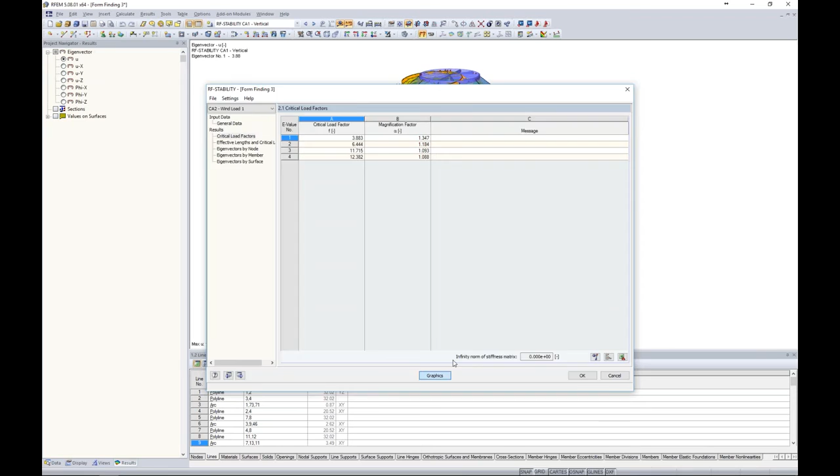Now, in the same sense, going back to RF stability, I have created a second case here called wind load, and I imported my load case number 2, my wind pressure column. I run my calculation, I get my critical load factors for my first wind load case. Again, I can view all of this graphically to view the different buckling modes. So just quite interesting to show you what the behavior of the structure is under those applied dead loads and wind loads. So why do we do this?

Well, back under data, we have another add-on module called RF-IMP. RF-IMP allows us to apply imperfections to the structure. Now, imperfections can be related to the AISC, Chapter C, the direct analysis method, where the code tells us that if we want to apply things like notional loads, for example, to account for column out of plumbness or member out of straightness, we can apply imperfections and manually model these types of imperfections.

It's certainly important in Eurocode, as the Eurocode calls for imperfections within all of our load combinations. AISC is not so straightforward with that. It kind of really depends on some different factors, but regardless, it can be applied for all design no matter which standard you're looking at.

So when we're looking at RF-IMP, we can actually import the buckling mode from RF stability. That was what we were just looking at in our other add-on module. You can see all of my different cases here, for example, my first case, vertical. Now I can export those imperfections being generated by RF-IMP as a load case. So load case number 7, and I've named it vertical.

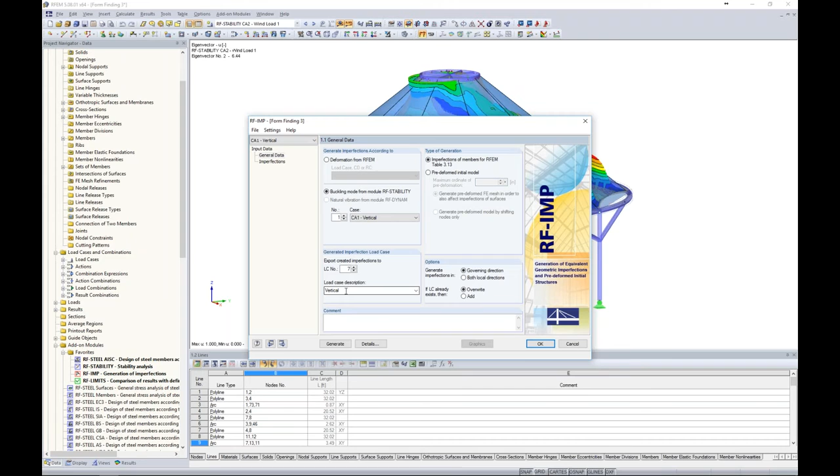So once I click generate, what exactly does this look like? Well, taking a look at my drop down here, I can take a look at the vertical here, and it looks like it's not showing up quite yet. Let's see. Well, regardless, we can view them graphically, but let me make sure that they are being exported here under our load cases. So like I said, these imperfections are being exported here as load cases such as vertical, wind load 2, 3, and 4. I click OK. Let's take a look and see if any of these other ones are showing up.

Yeah, there we go. Okay, so here they all are, and basically this is what it's accounting for, column out of plumbness. We can zoom in here and see this is set at L over 400. So these are just dependent on our normal forces within that column, and then we can account for that column out of plumbness, or we can account for member out of straightness with these imperfections.

So as I mentioned, they're exported in as these load cases, and then under combination expressions, you'll see here that I activated my LRFD load combinations for design purposes. I unchecked my ASD because now I want to move on to my member design. But keep in mind, you can utilize both LRFD and ASD within one model. I'm just trying to simplify for today's purposes.

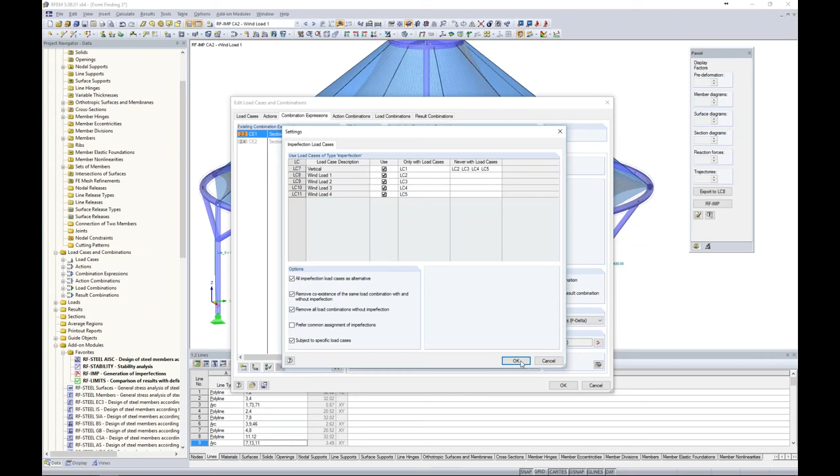So under our LRFD load combinations, we can activate these imperfection load cases. Then under here is where we can say, okay, we'll apply this imperfection with this load case and this imperfection with other load cases. So just some parameters here on how to apply those imperfections. Then under load combinations, you can see all of the different imperfections applied with their associated load cases such as wind load. For example, LC9 is the imperfection from wind load 2 applied only to wind suction at column. LC10 is wind load 3 applied only at wind pressure between column. So that's just kind of how we can apply those imperfections to the rest of the structure.

Now, lastly, we can run an analysis, a code check here from our analysis according to the AISC module, for example.

Same goes with Eurocode or the CSA steel module. Basically, I created two cases here just called beams. I checked all my beams and braces, and I am checking them against my LRFD load combinations. And keep in mind that this module looks very similar to our RF-LIMITS module. So once you learn one module, the rest of them are pretty intuitive to use, which is nice.

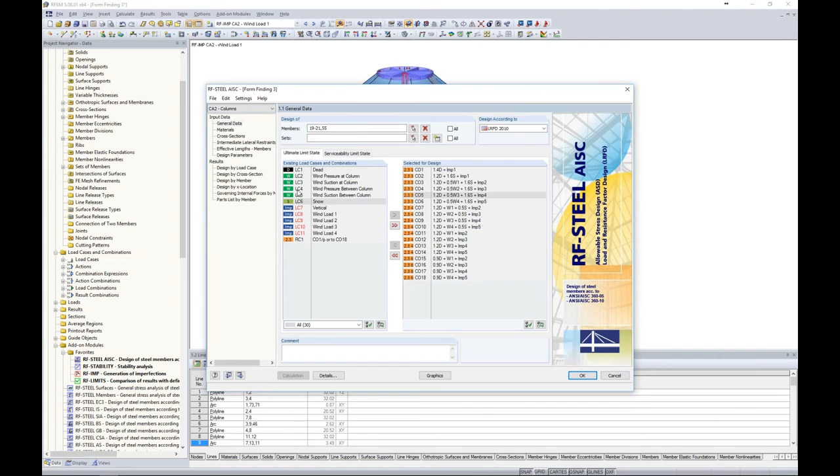And then I also ran a second case to take a look at columns here. We run our calculation based on these LRFD load combinations, and we get our code check directly from the AISC. So it looks like our columns are well below 1, judging by our big green smiley face here, and we also have our beams and braces at 0.73. We can view everything graphically as well to see that everything is below 1.0.

So again, this is just to show you guys that you can utilize all of these other add-on modules for a complete structure design. If we want to go back and take a look at our form finding, we can do so here with our membrane. So everything is tied together. Okay, so that really completes the overall structure design.

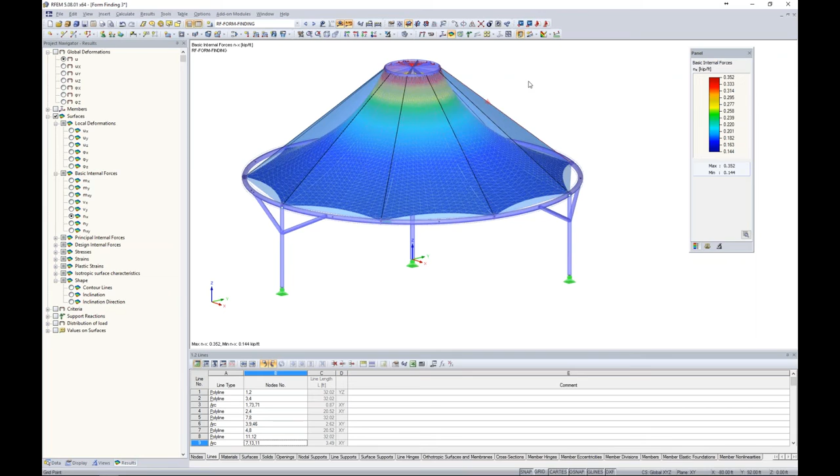Now the last thing to touch on is the RF cutting patterns. So for this, let's turn this into an elevation view and turn off our results. So as far as cutting patterns, remember we're trying to turn this 3D membrane element into a 2D pattern in order to give to the fabricator, whoever is going to be producing this membrane. And right now, these surfaces are pretty large for our 2D cutting pattern.

So, you know, we could take these surfaces and cut them in half, but that would require some remodeling, and it's not very user-friendly. So we have a nice feature in our Project Navigator that we can right-click under lines to create a new line. And again, this is what we saw at the very beginning of the webinar, but instead we're going to choose Cut via a section. So all this is going to do is it's going to apply it to surfaces 1 through 9.

We move on to the next tab, and I'm just choosing a couple points here of where to make my section cut. So for example, I can graphically choose up here at my origin. My second point, maybe we'll go with this surface right here. I'd like to choose the cut right down the center, so I'll choose my second point down here. The cut type will be a section, and the definition type will be according to a direction vector. So this direction vector can be something completely arbitrary. For example, I can just put 1 foot here in the global Z direction.

I click OK, and now you can see that that line was added to this surface element. This is still a single surface. It's just purely a line that was added. And what I can do is I can highlight this line, and I can use my rotate copy tool, which is the same thing that we've been using, but you can also right click on an element to utilize this tool.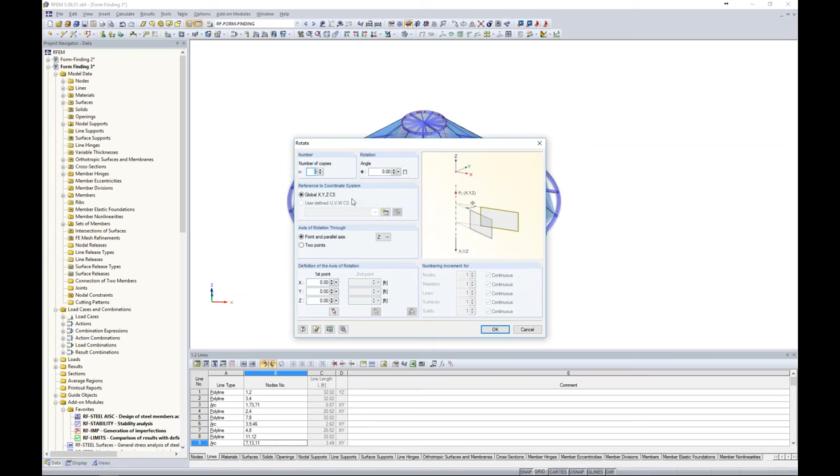Here I'm going to create 8 copies at 40 degrees. Make sure that my settings here are turned off. I click OK. And now the program is going to create a copy across all of my surfaces of just that simple line element. Nothing too complicated here. So now going back to my elevation view, I want to generate my cutting patterns. And for this, I just simply go to Tools, Generate Cutting Patterns from Cells.

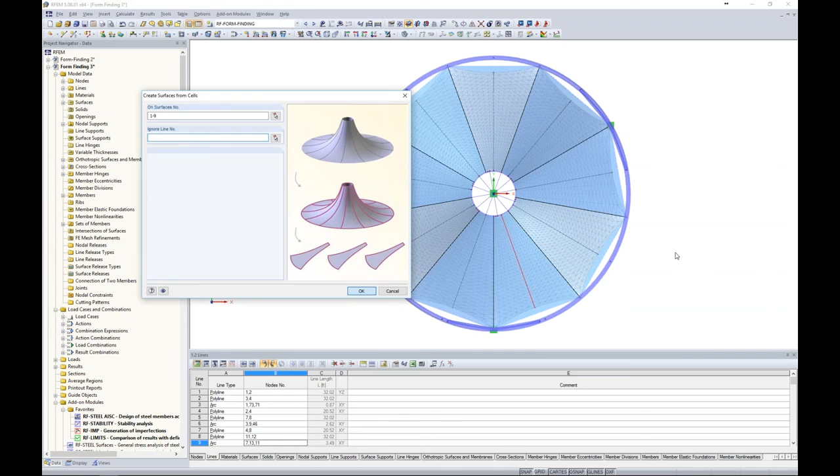Now this dialog box is very simple. It's asking me what surfaces to apply it to, 1 through 9. And do I want to ignore any of these lines? Well, no, I don't. I just added these lines to create smaller cutting patterns. So I click OK. And then the program generates these 2D cutting patterns. You can see this little symbol here that I can double click.

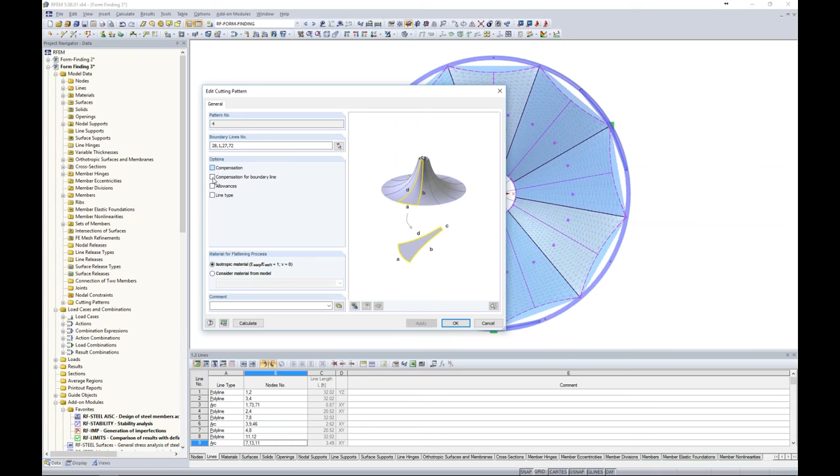So when I double click this symbol, it's quickly calculating through to determine the cutting pattern from a single membrane as far as the input data. So this is for pattern number 4, which we can see is highlighted here. And we have some options such as compensation, compensation for boundary line, which as we select these, we get these tabs that are populated up at the top. So taking a look at these tabs in particular, if we look at compensation, remember that these membranes are probably going to be stretched when we apply them to our structure.

So as far as a 2D pattern, we need to take that compensation into account. Now we can do so whether that's standard in the warp or weft direction. We can even apply it at an angle if we'd like to.

So as far as the compensation, we can apply a percentage here, for example, the warp direction or the longitudinal direction of 1%. And we can do so with the weft direction, the transverse direction, at 3%. So this is more of a uniform application to this 2D cutting pattern.

Under the next tab, different compensation by lines, well, this allows us to take into account different compensations for each line, boundary line, if we don't want to necessarily do so more in a uniform manner that we did on the last tab. Here we have allowances. Allowances are for welding lines or for border lines.

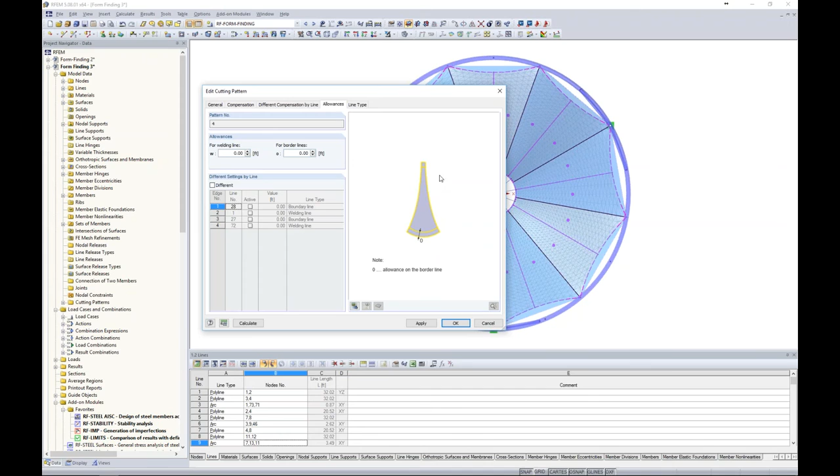For example, let's say at the top and bottom of the 2D cutting pattern, we'd like to add 8 inches of additional material. Well, we can easily set that by setting this to 0.66 feet. Then down here at the bottom, if we don't want to globally set those again, we can check them on for a different application for each boundary line or welding line.

For example, taking a look at line number 72, which by the way, we can always activate our numbering for our lines back in RFEM and have those on in the background as we're looking within this dialog box if we don't know which line number 72 is. But I'd like to activate this because my adjacent membrane may be overlapping this a bit. I want to add in 4 inches to this particular welding line.

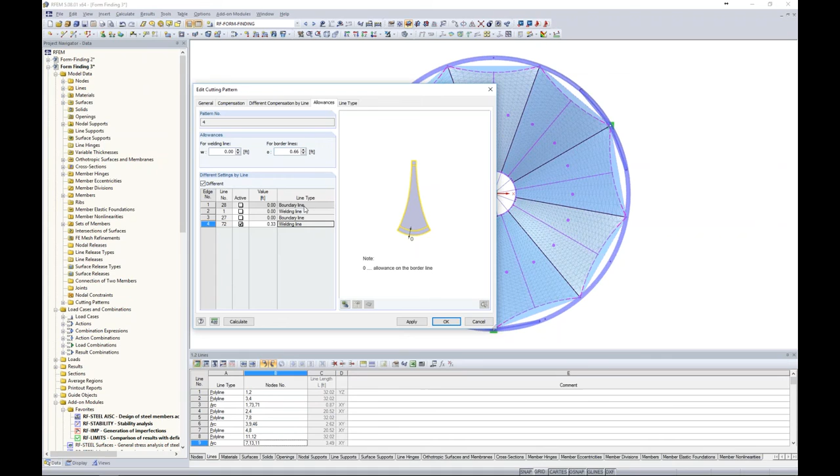Now you'll see that the boundary lines are automatically calculated by the program. It's pretty smart with those, but if you're like, oh, that's actually not a boundary line, I'd rather it be a welding line, well, that's where the line type, you can use your drop-down box here to change that. So now that we're done with all of our input, we can click Calculate.

Now, what I've done is I have an additional model here that I can launch because for all of these different 2D patterns I set each one to have its own border and allowance additional width to it. And then I ran the calculation for all of my different patterns. So now we get a couple different tabs up here, which is our 2D cutting pattern. And once we run the calculation, we get the X and Y coordinates for our 2D pattern here.

Now, this is a table, and as I scroll through this table, it is synced up to my little graphical view over here on the right. I can always zoom in, and it's all based around my origin right here at the center about what these X and Y points are. I can also turn on my global mesh here within the cutting pattern. And right now, this is without my allowances, so without that welding and additional allowance at the top and bottom.

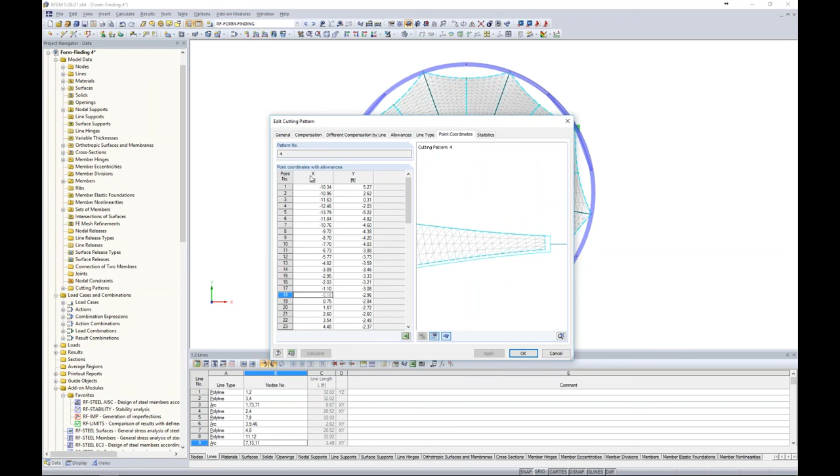So I can also toggle that on. You can see here's my 8 inches at the bottom, here's my 4 inches at the side, and my 8 inches at the top. And now my point coordinates here should reflect these different allowances taken into account, which if we zoom in here, we can see this.

So here's our option to export directly to Microsoft Excel. I think this is a very powerful feature because obviously Microsoft Excel will have a lot more capabilities in terms of sorting data than what any structural analysis program could do. So we give you that option to do so here.

Under statistics, this just gives us our area, our 2D area, our 3D area. Again, we're turning this 3D area into a 2D area based on the minimum energy theory. We also give you the height and width of the 2D cutting pattern with and without allowances. So that's basically all as far as the output for the cutting pattern.

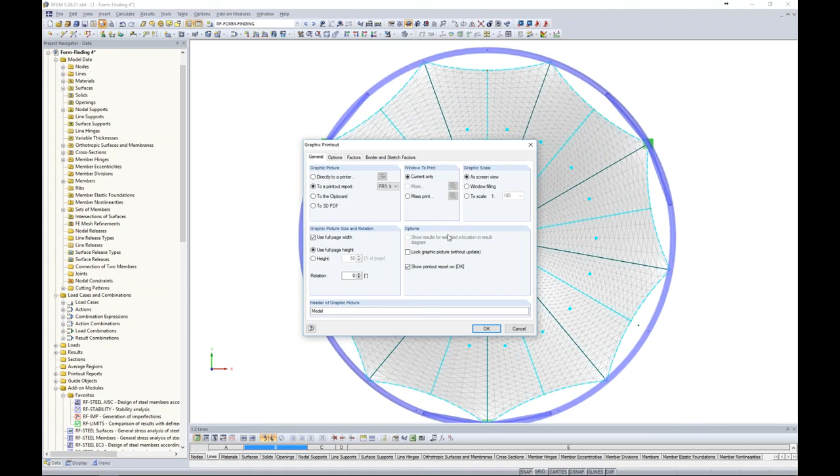Now, let's say we would like to generate this to our printout report, and we'll start with generating a nice picture here of our plan view. Well, for this, I can simply print my graphic, and we'll choose the current view only to use the full page width, full page height.

We click OK. So what the program's doing now is it's cycling through to create my printout report, and it takes just a second here because it's collecting all of the input data and all of my results, especially including my cutting patterns, and creating a printout report.

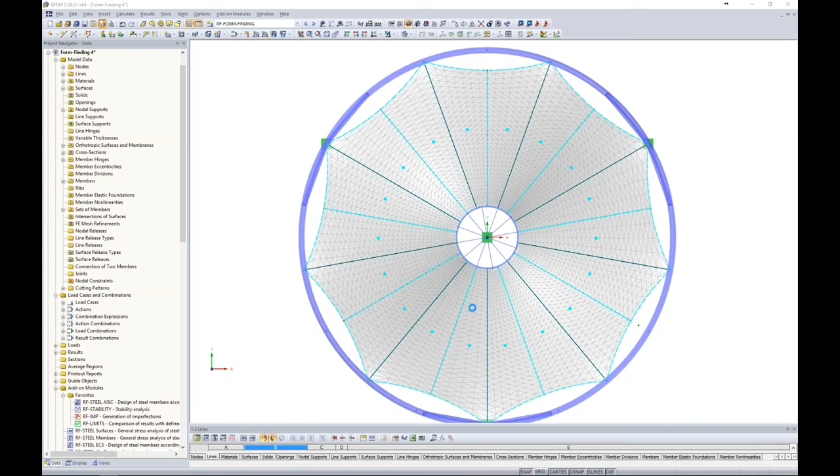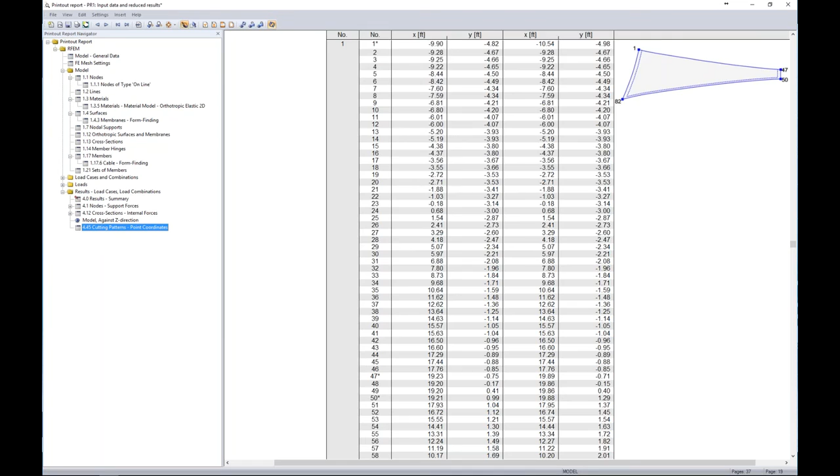So I can jump down to that picture again, and if I scroll down, well, here is where my cutting pattern information is. So here's my X and Y coordinates without overlaps, with overlaps. This is for pattern number 1. I have a nice little picture generated here with my node numbers, and I can scroll down to all of my different cutting patterns. So it's very powerful in how we can present this information in our printout report as well.

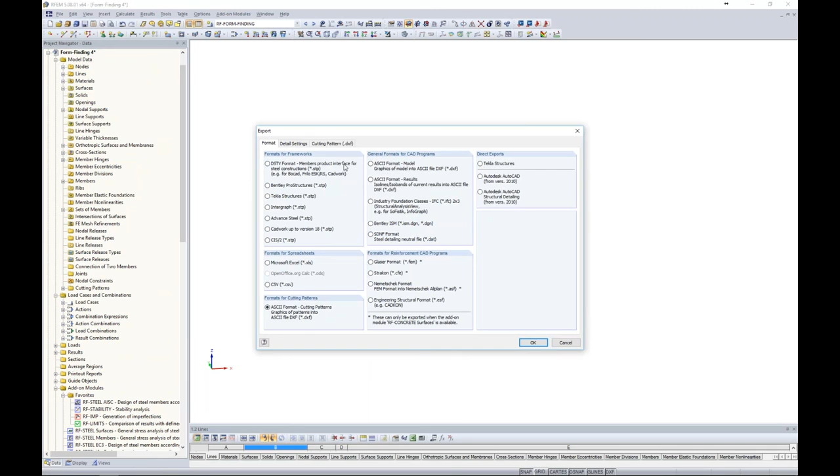So one final thing to show you is how to export this information to a DXF file. What we can do here is go to File, Export, and down at the bottom we have this option for formats for cutting patterns according to a DXF. Now we will have an additional tab populated here, and this is where we can export our cutting patterns. And then we just give it a few parameters here, such as the number of patterns per row. Well, I can set this to 3, for example. The distances between patterns can be set at 3 feet.

Here is where we can export the 3D shapes or our overall structure. We can also export the cutting patterns FE mesh or uncheck this if we don't want to see it. And lastly, we can export the 2D cutting patterns as 3D face elements. So I click OK. I can save this DXF file, and what the program will do is to cycle through and to export this, and then up will pop a little dialog box telling me that the data export is complete. Data successfully exported to file.

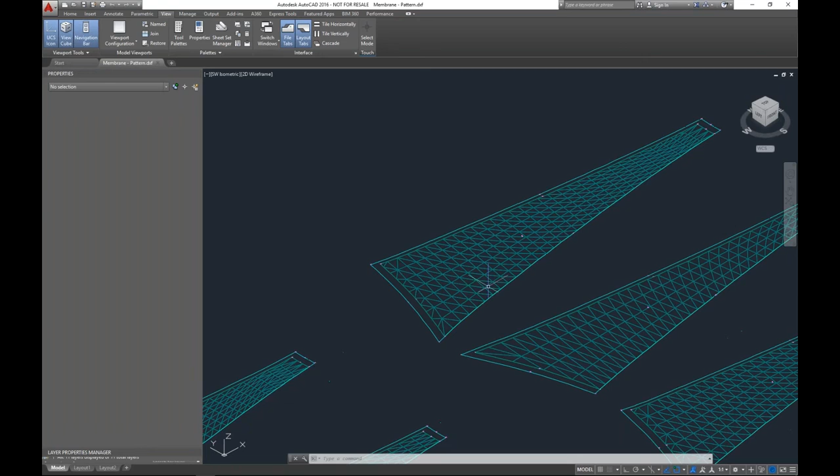So now in AutoCAD, what I can do is just to open that file, which I already have saved here. This is just the DXF file that I just created. And you'll notice that this is my model that I just created. Here is my 3D element, and here are my different cutting patterns. If I zoom in here, I'll see that each one is labeled according to the different cutting pattern that we had in RFEM. We have our FE mesh that was generated in addition to our tolerances, both for the welding line as well as the top and the bottom offsets here.

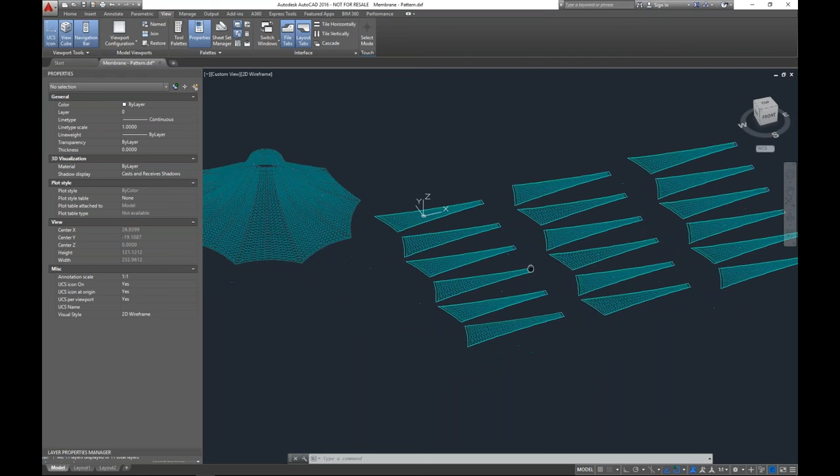And of course, within AutoCAD is where we can add dimensions for these cutting patterns, because everything is to scale according to these point coordinates that were created in RFEM. So again, very, very powerful in terms of creating these cutting patterns. Okay, so with that said, jumping back to the PowerPoint, we can sum up today's webinar.